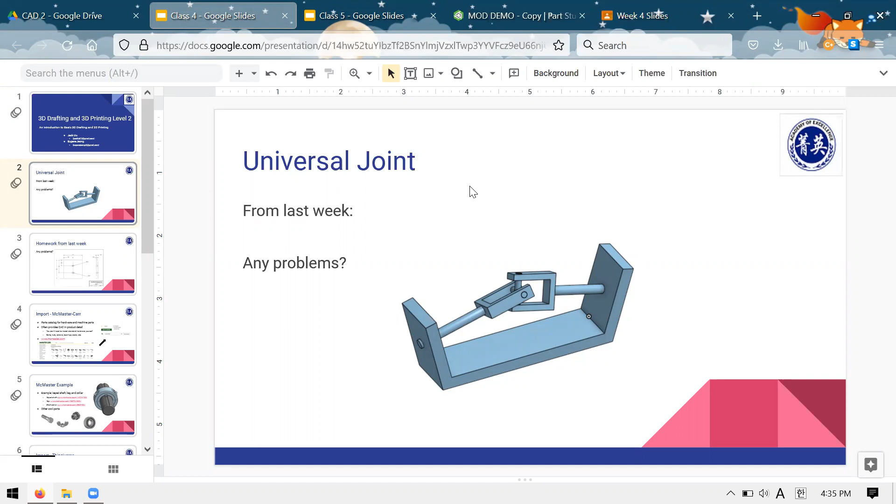Great. So we did that, and then we also went over the base plate, which was the other assignment from 2 weeks ago. I think most people made an attempt at it. By this point, hopefully you know enough about how to read drawings that you could make something like this. Another thing we talked about was how to download parts and import them into your own Onshape document.

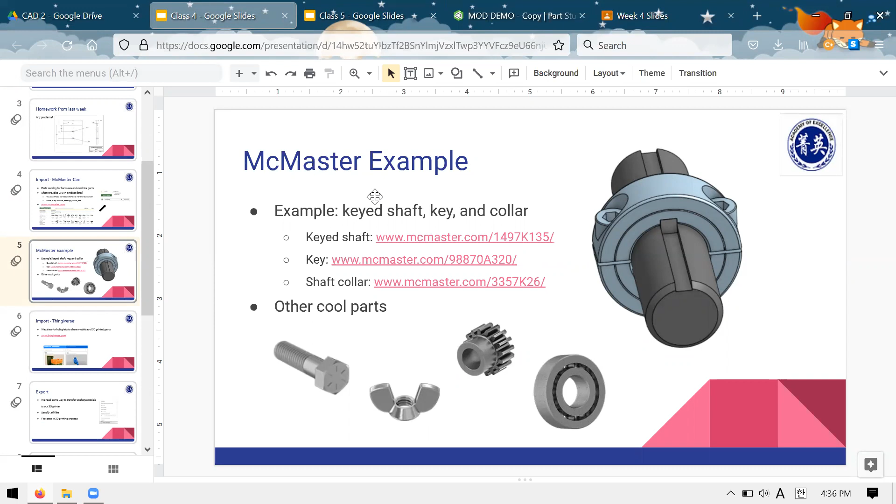So later on, we'll have a part where you'll probably need to download things. So if you weren't there to see it, I'd recommend, if there's a video, watching that or the recording. We also did the inverse, which is exporting a part from your document into a normal file that you can send to other people.

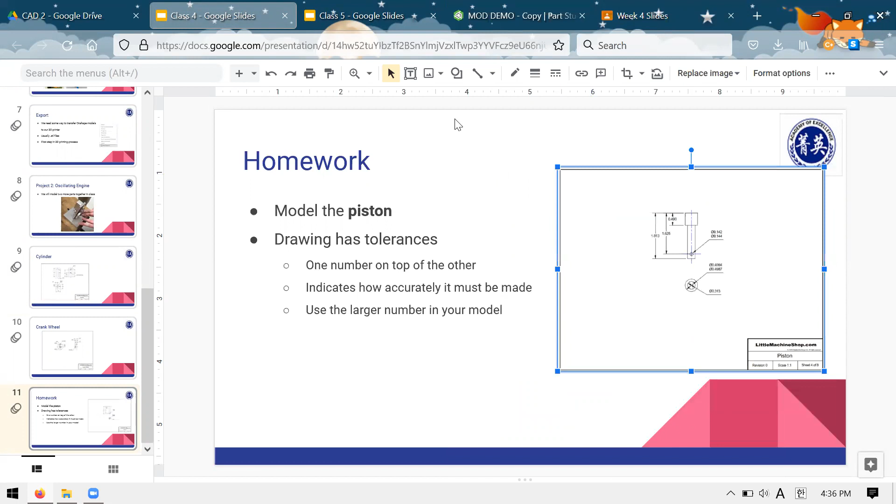And the homework from that week, I believe: in class we made the cylinder together, and the homework assignment, I believe, was this piston. So all of these drawings, as I've said, are available on the Classroom, where I have previously posted all of the drawings, and the website where the drawings originated from.

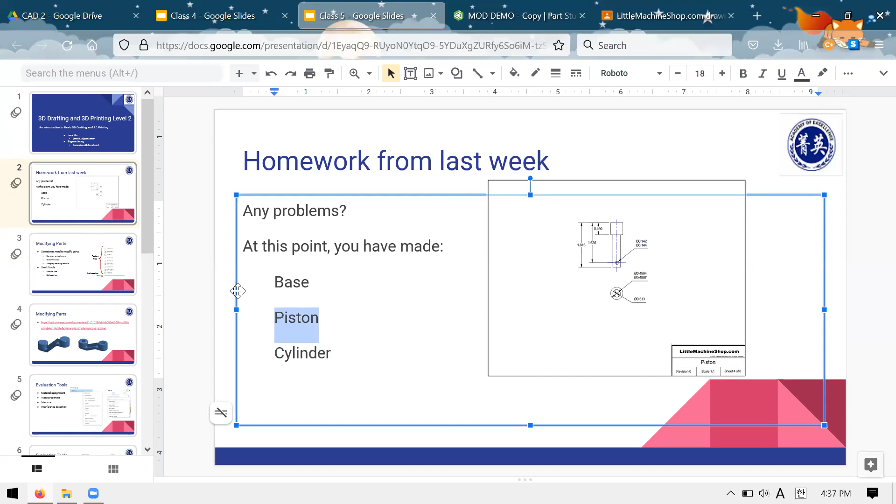So this week, as I said before, we're starting off just taking questions. At this point, you have made the base from 2 weeks ago's homework, the cylinder we made together, and the piston was the homework assignment from last class. So you should have these parts. If you're not quite done with all of them, don't worry too much about it. We have a way to deal with that when we get to that bridge, but if you have any questions with the CAD, I'll go through them with you or debug them.

All right, so the piston was easy enough, right challenging level. I explained you can just ignore the tolerances, so a fairly straightforward part. I'm not too surprised if you don't have any questions. So we'll get right on with it then. So this week we'll talk a bit more about what you see when you look in your CAD program. You may have heard me refer to these things before,

and specifically we're going to look at how you might go about modifying a part, especially if you're working on a group project, you might not be the only person who's working on this document, or you might be working with someone else's part document, and you may need to change it, maybe to fit the new design requirements or to accommodate something to meet your own purposes.

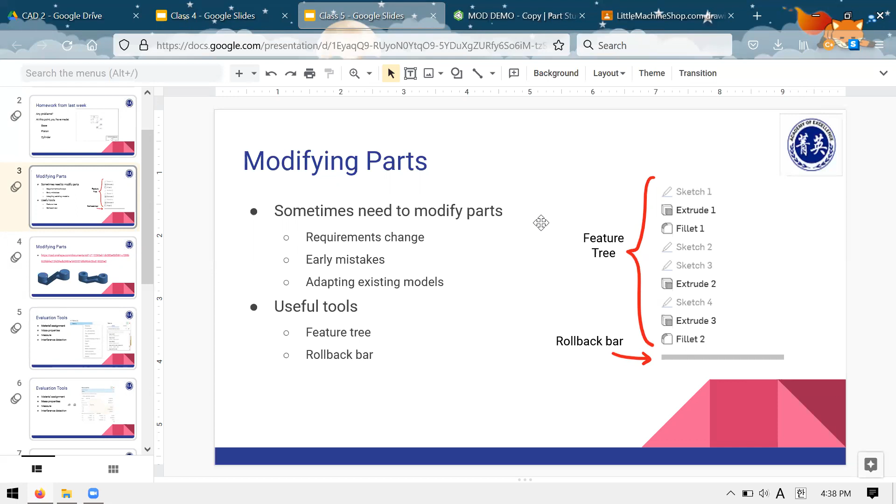So another place where you might see this is when you're working on a model over a long period of time, maybe later on, you discover that something you did earlier on was not good, or there's a mistake and you need to go back and correct it. And so how do you do this? What you've probably seen before many times, I've referred to this as the feature tree.

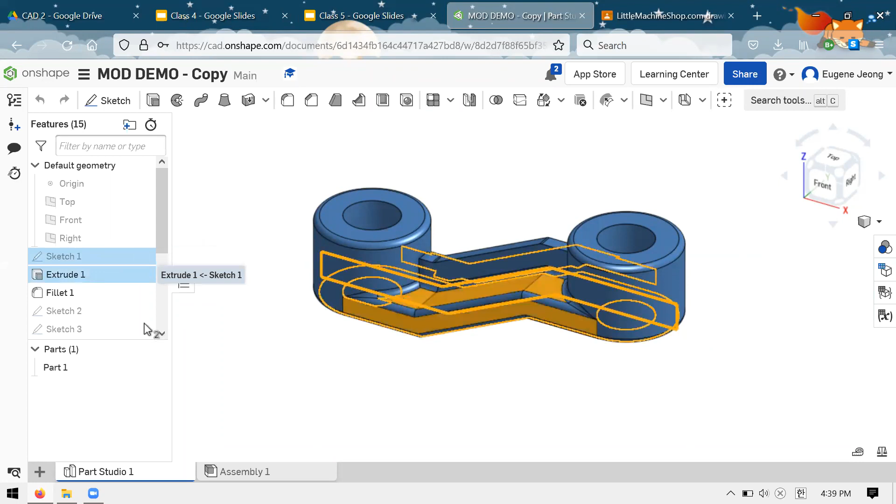So you can see the word features up here. And in this list is pretty much every operation that you've done in the document. So you can see that when I created this part, I created a sketch, I extruded it, I did these fillets, I did more sketches, more extrusions. You can see basically a history of everything that I've done to create this final product that I have here.

So this is what's called the feature tree, and you'll have this on every one of your parts. And one thing I'll show you is that the feature tree adds features in chronological order. So every time you add one, it gets added to the bottom.

And this little gray bar here is called the rollback bar. What you can do is actually click and drag on this and move it up. So let's say move it up to here. It'll actually take you back in history to when you only had these features. So before you created these features, now you're looking at the document at the state that it was when you had only made these features here.

So what's really interesting here is now that I'm here, I can create sketches. For example, I can create a sketch here, draw something. I'm not going to do it, but you can see that I can modify a part, and then when I'm done, I can bring the rollback bar back down, and it'll attempt to recreate all of these other features that I had before. So it's a very useful tool for modifying parts when maybe before I add these holes, for example, I needed to do something else, then I can go back, maybe add another boss here before going for this hole.

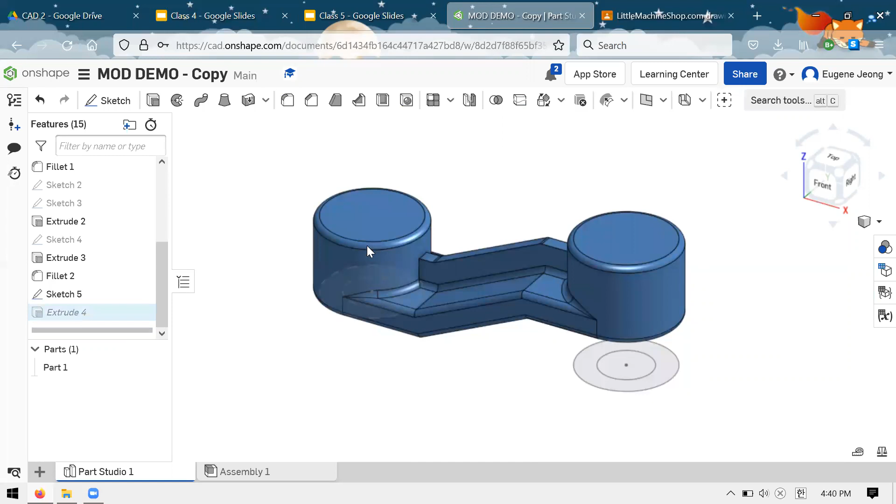That's the usefulness of the rollback bar, which you might not have known existed, but think of it basically as taking yourself back in time before you did any of these things that are below it. And once you're done, you can go back to the present just by dragging that bar back down.

So with that, that part that I just showed you, you should be able to open it up by clicking this link that I put in the chat. If you just click that, I believe I made the document public so that you should be able to edit your own copy. What you may need to do is create your own copy. So in my case, I see this, but it might not let you edit. If it doesn't let you edit, I don't know, it should automatically create a copy, I believe.

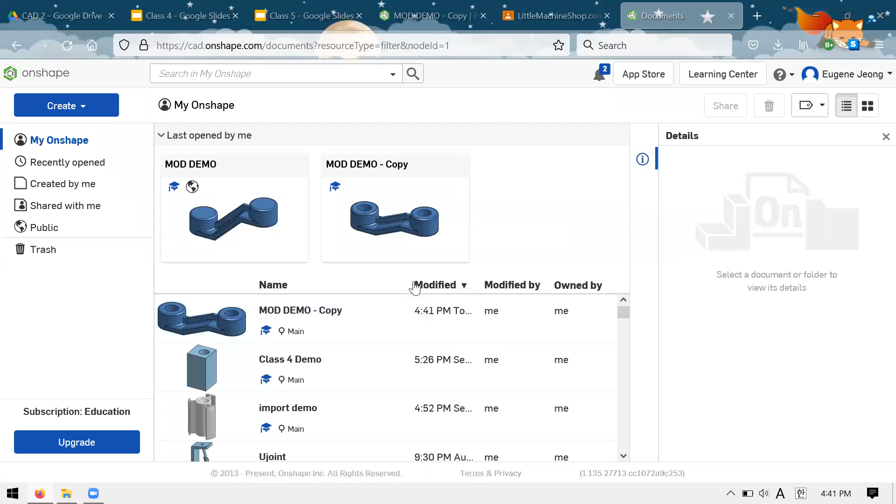Hard to say, but if you click on this link and it opens the workspace, but you're not able to edit it, all you have to do is go back here, right click on it, and, where is it? Copy the workspace. Just hit OK. And for me, I already copied it, so I have a copy of a copy, but the copy you should be able to edit. So take a moment right now just to click on that link that's in the chat, open up this document, and get a version of this document that you're able to make changes to.

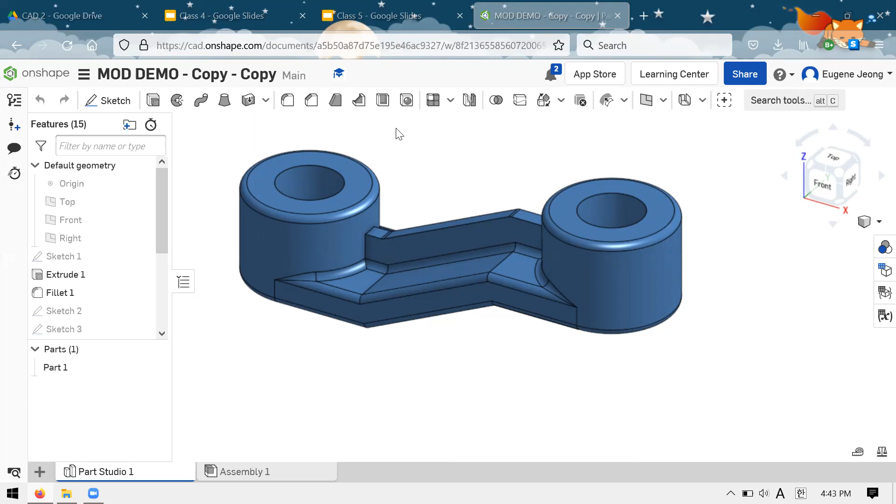If you have any trouble getting there, let me know. And if you are able to open up this document and you're able to edit it, then also please let me know in the chat, or I'll not know when to move on. Okay, so it seems like at least one person is able to do it. So that means it is possible to do it, which is always promising.

Our objective, at least for this activity, is going to be an exercise in modifying a part. So let's say that you're working on one of your project teams, maybe for a school project, you're trying to design a part. And let's say that you're working with someone else and someone else gives you basically what you have here, right? So from here, what you see right now, I believe, is the part on the right. And your task is to essentially create the other one that you see here.

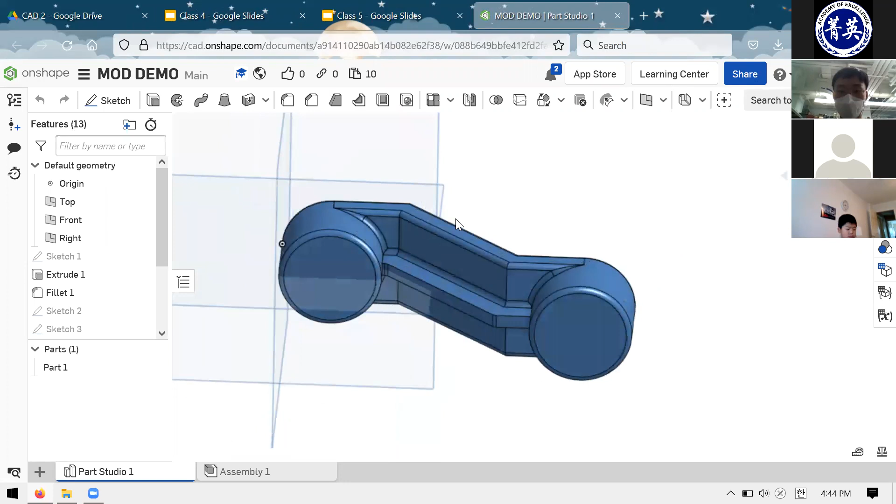So you have this version, sorry. You should have the version on the left with no holes and this steep angle. And I want you to create this version on the right that has these two holes in it and the angle is shallower. So given this part that you see here, and using what you know about how to create sketches and use tools like extrude, just take a few minutes to try to create this version on the right that has the two holes that go through the circular parts and modify it so that the angle is shallower. So you can see here that here the angle is pretty steep, right?

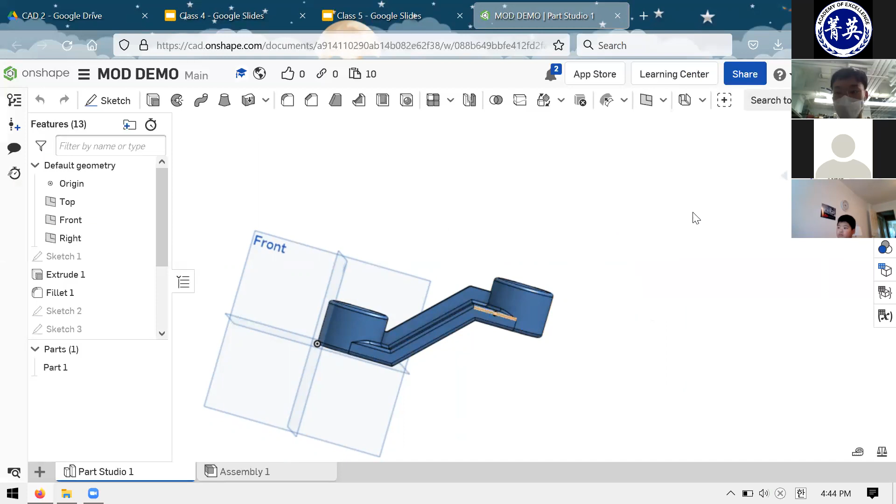You can see this angle here, and maybe you can't tell that well in this image, but here the angle is a lot shallower. So there are two changes you need to make, and I'll give you a few minutes to work on that.

Confused. Yes, I'm confused. I did not get what I'm supposed to do. Okay. Do you have a question? Yes. Don't get what I'm supposed to do.

So the objective here is to take this part that I linked to you in the chat in the Zoom, and from that part, maybe you have to create a copy, but make a copy that you're able to edit, and then make the changes to this part so that it looks like this picture on the right, where there's two holes and the angle here is shallower than the one on the left. So hopefully that was more clear. If you have more questions, just ask.

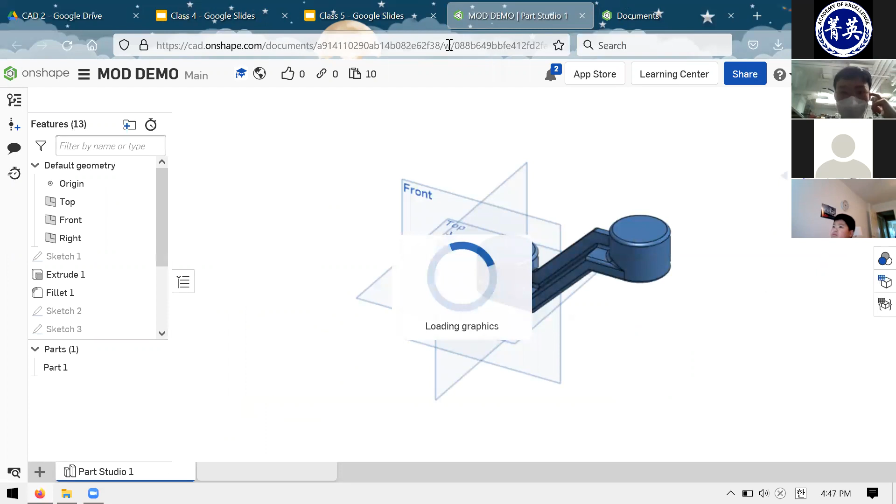I can't. So if you're not able to edit the part, like I said, what you might need to do is go into your workspace, and you might need to create a copy of the workspace. How do I create a copy again? Let's see. In my case, since I'm the one who created the original document, I don't exactly see what you see. I mean, can you just show me? Let me see.

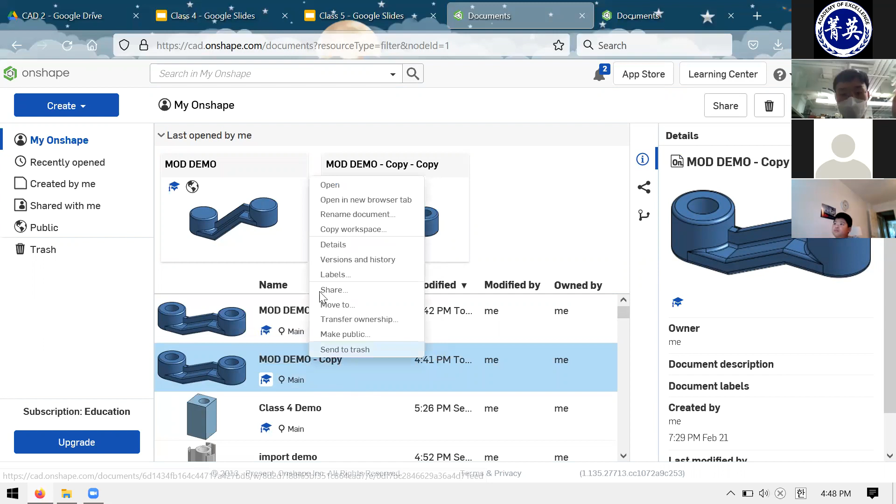So I'm guessing if you just go back to your workspace, it doesn't show you. And how do I copy one? If you go back to this page, are you able to see the workspace of this document, the mod demo? Yeah. You are? I do not see. I see the mod demo copy. No, I don't. Well, if you see something like this, you can just right click on it and click copy workspace. And the copy of the workspace, you should be able to edit. Oh, okay, I got it. And now I can edit it. Cool. It should be simple.

So I'll give you all just a couple more minutes, and then I'll call on someone to explain what they tried to do.

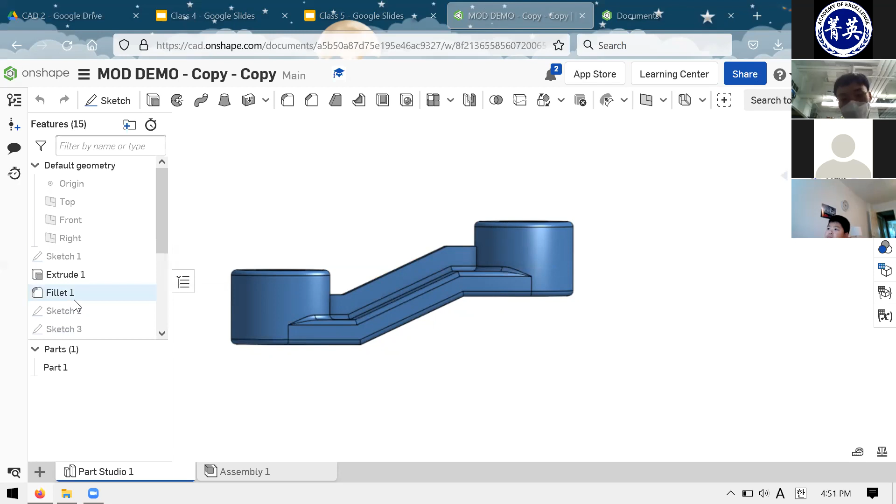All right, so since it seems like it may have been a bit tricky, one thing I would do is think to myself that I see this model and someone else gave it to me. I don't really know how it was created. So what can I do? Off the top of my head, there's not any basic feature that can just change an angle, like stretch it around like I could with my hands.

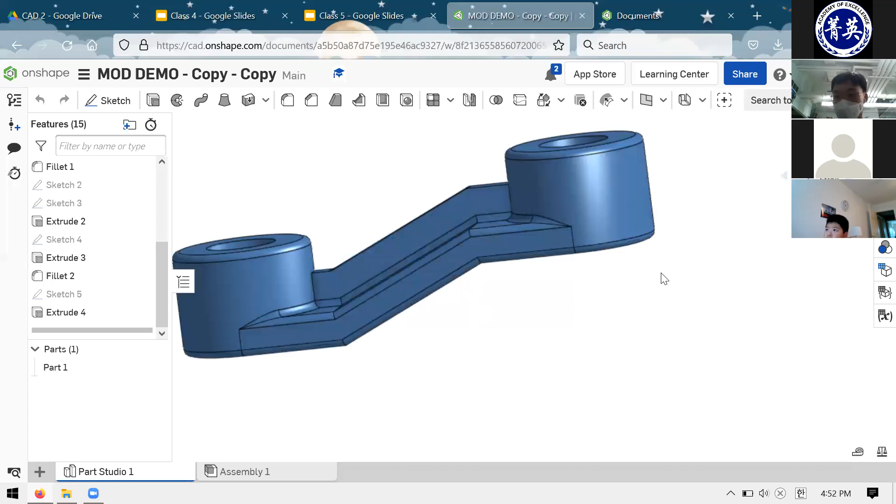So the first thing I want to do is understand how this model was created. And the way I can do that is using this rollback bar, which I explained a moment ago. So we're looking at this part, and let's just roll it back in history. I guess I should demonstrate on the version that you're looking at.

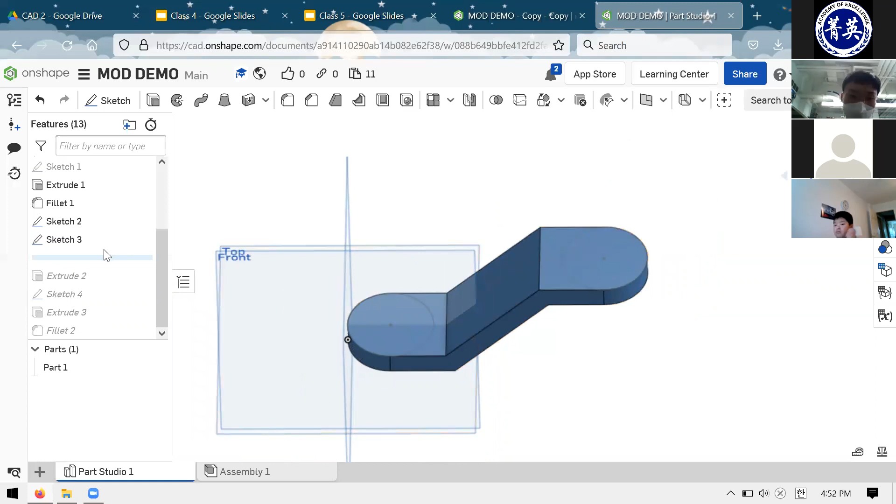I roll it back. So the last change was just rounding off the corners. Let's see, I roll it back again. I can see, oh, the next last thing that was done was creating this kind of bridge here. If I roll it back another feature, I can see, okay, so this person created those bosses, and I go back another feature, they rounded off these corners, and I go back another feature.

So now I see the sketch, and here I kind of see how that angle was originally created. It was created as a sketch here, where this angle is probably defined somewhere in the sketch. So at this point, what I figured out is that the creation of this angled feature happened no later than this very first sketch. So I know I have to change this sketch in order to change that angle. So I go in here, I click on edit sketch as you do, and I can look at the sketch. And fortunately, the sketch has been defined in such a way that I can easily see where the angle comes from. It's this dimension right here.

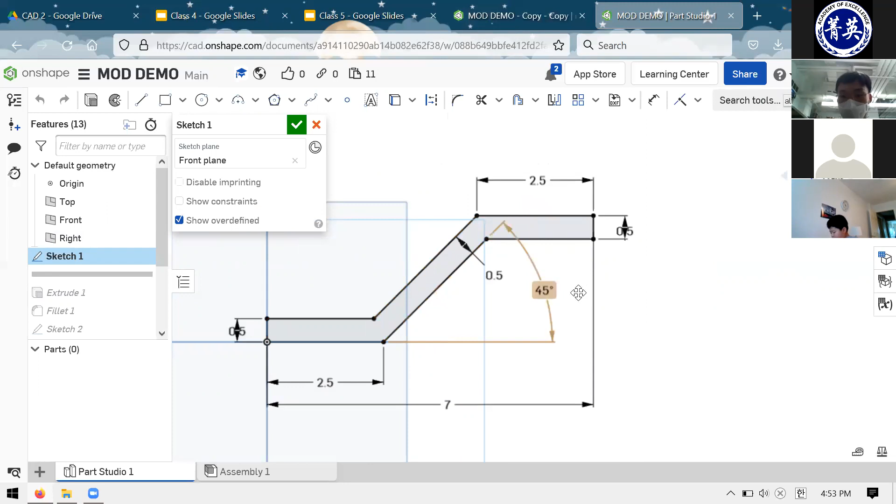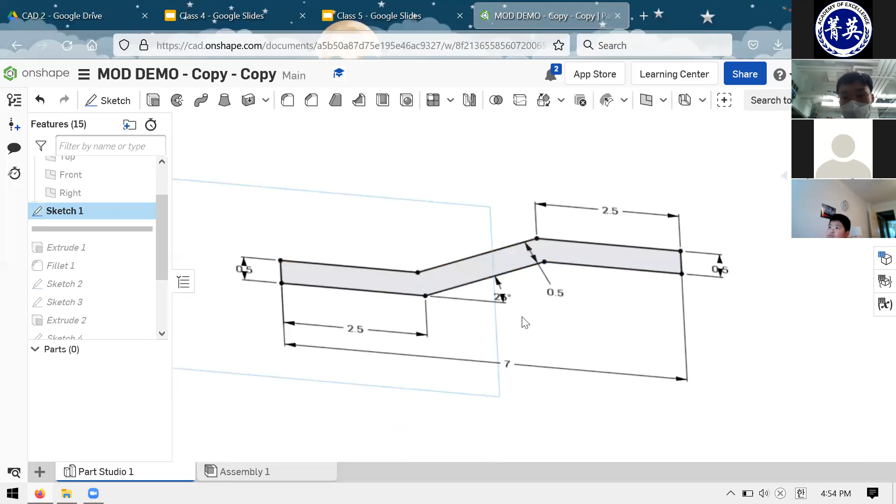So what I can do, and I'll go back to the other document. What I can do in this situation is go into the sketch, hit edit, and I can just change this angle. So you saw in the other version how it was 45 degrees. Maybe I can change this even further, maybe to 10 degrees. So now it's even shallower. And if I click OK, the sketch is OK.

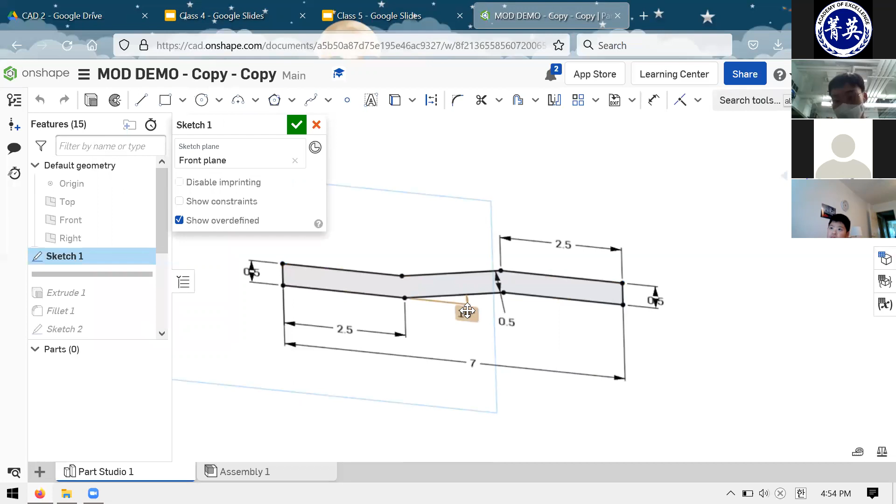And let's roll it back to the present time, with all the features on it. You can see, because this part was designed fairly robustly, at least robustly enough to handle that changed angle, that the final result now has that changed angle. So we kind of went back in time. At this point, I identified what sketch the change I want occurred in. I entered that sketch, and I can just go in and type whatever number I want. Maybe I'll go back to 45 degrees. I made sure that it works, and then I just rolled back to the latest feature and the model updates.

So hopefully that all made sense. If you had any questions about that, let me know. But it's kind of an approach that you might use if you're greeted with a part that is pretty unfamiliar to you, but using the rollback bar, you can get a good sense of how this thing was created chronologically. And that can let you make the appropriate changes as well.

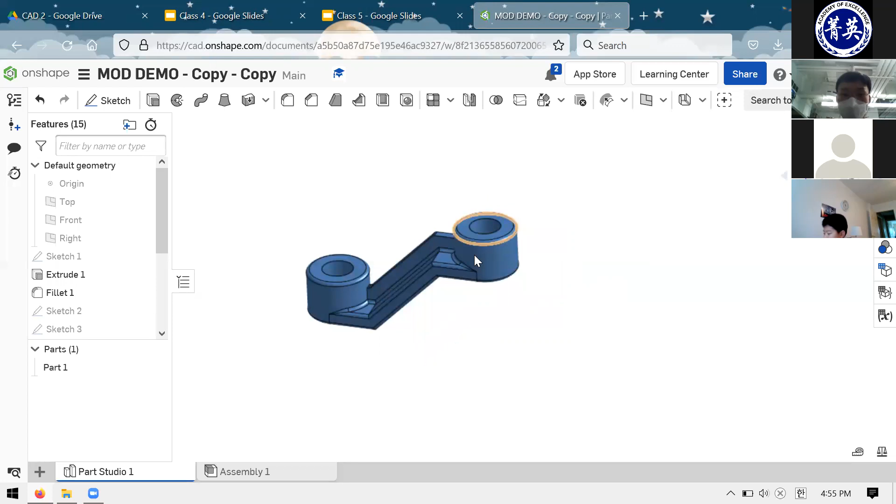One thing that I'll say is that not every model is constructed in such a way that you can just change things like that. There's a lot of times, maybe with fillets especially, where if you make a big change early on in the feature tree, there's a good chance that it will just break things, or these features will refer to things that no longer exist, and then the whole model will kind of break. So in those cases, you have to individually go through each of the broken features, figure out what's wrong, and fix it. So in this case, we got kind of lucky, but it worked out, and hopefully it taught you something useful.

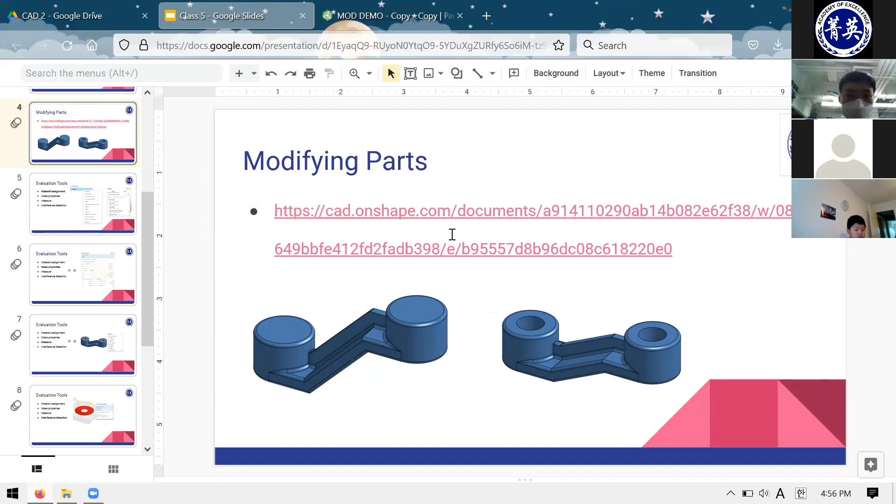So that was our first activity. I didn't hear any questions, so we'll move right along. I'm now going to show you a few other tools that are very useful in the Onshape environment. A lot of these tools are common to other CAD programs, so if you use those, you'll probably have an equivalent. And these are especially helpful if you're designing a part for a real project, maybe a school project or a team where you're trying to build, say, a robot. In those cases, you need more information about the model that you might not be able to get by looking at it.

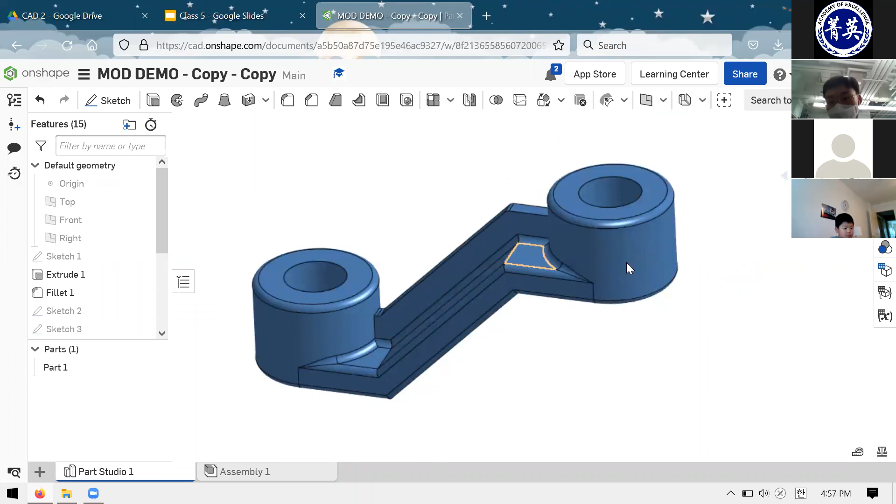And the first thing I'll show you is material assignment. So let's see. I'll just work in this copy. When you create a model, the computer doesn't treat it like a physical object, right? It's just a bunch of geometry, and this geometry consists of basically an enclosed volume. But in real life, there are no such ideal enclosed volumes that just exist abstractly. All objects in real life are made out of some kind of material, and that gives them properties such as weight or density, strength. All those come from the material.

So if you want to understand, for example, how much your part weighs, then it needs to have some kind of material. So if you right click here in the bottom left corner on the part, one of the options here is to assign the material.

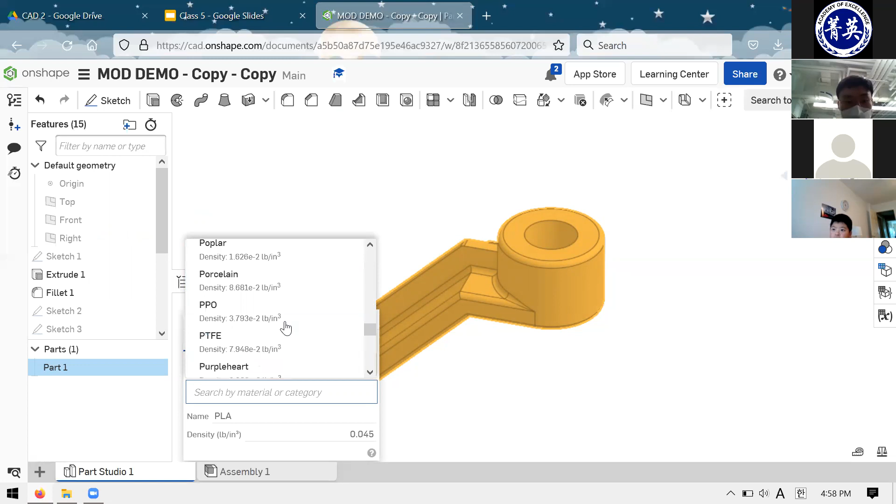And if you do that, Onshape provides this material library. So for most purposes, you'll probably find something appropriate there. You can also do a custom material, but you probably don't really need that. And you can scroll around here, you can see there's a lot of options. PLA is the common 3D printing material. So that's probably one that you'll use if you use this feature at all. So let's say PLA, and it adds a density of PLA right there.

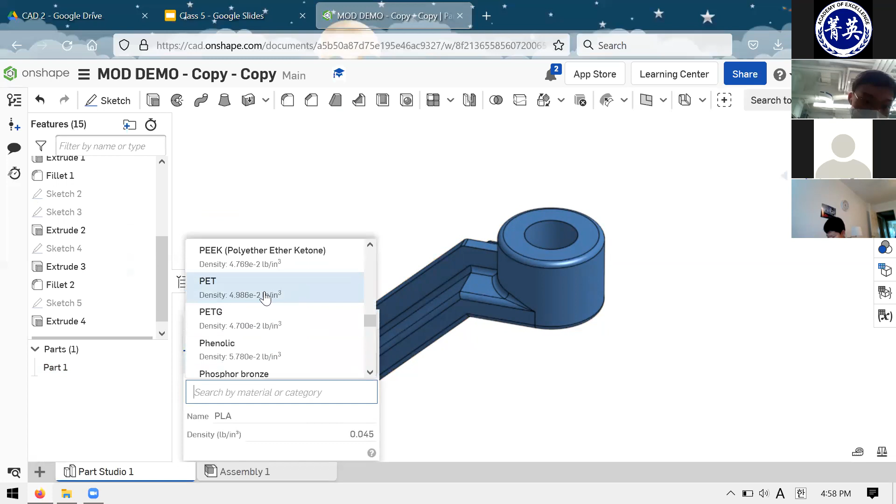So if I check on this, now Onshape will treat this... oops... It'll treat it as PLA. So I can change it to something else as well. I don't know, PET. If I change it, I can click the check mark and it'll make the appropriate change.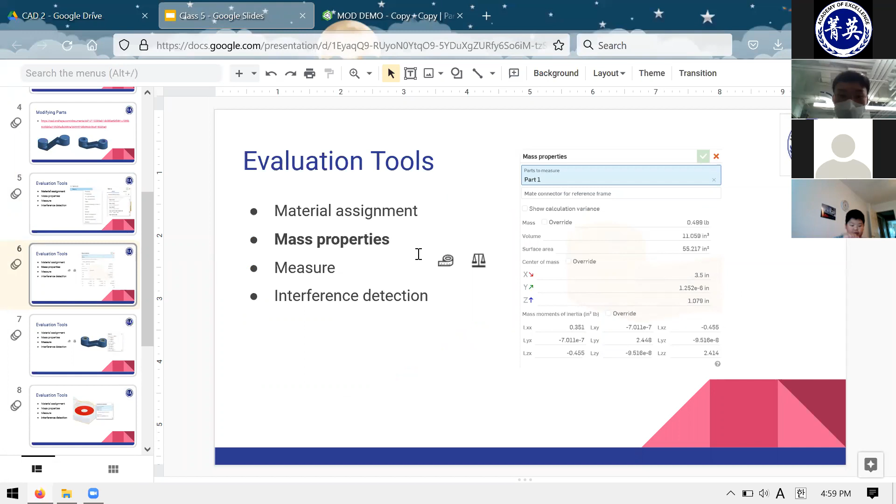So what was the use of me doing that? That's where this next thing comes in, and that is the mass properties. And so mass is very important when you're designing something, especially for a real system like a robot, because there you care about a lot of things like, for example, the weight distribution, or just in general, how heavy this thing is. So at the bottom right corner here, you can see there are two symbols. On the left is a tape measure, and on the right is a beam balance. So if you click on the balance on the right, you can see mass properties.

And the first thing it prompts you is for a part to measure. So I only have one part in this workspace. I'll click on part 1 here. And you can see right away that it pulls up all of these properties. So if you didn't assign a material, it won't know what the mass is because it's just thinking about this kind of abstract geometry. But once I assign a material, then it knows the density and it can calculate things like the mass. The volume is just geometric, likewise, surface area is geometric. But you can see how this might be useful.

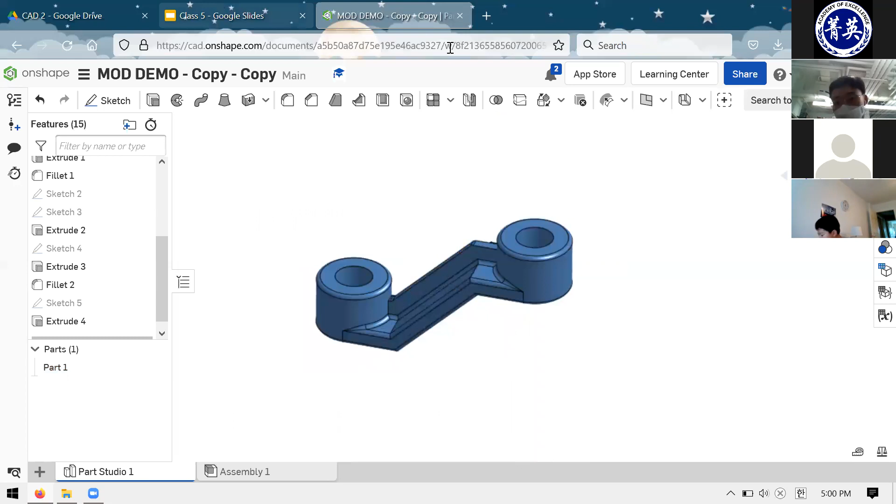For example, where you might need to know how big it is, how much surface area it has. If, for example, maybe you're trying to paint this thing, how much paint you need, that's related to the surface area. And there's no need for you to calculate things like that by hand because you have this handy tool here that'll tell you these things. Other things like moments of inertia, that's useful if you're doing strength calculations. You have things like center of mass. It's useful for weight distribution. So these tools exist. Don't worry too much about when you'll use these, but just know that they do exist. So if you ever do need them, you kind of have that connection there.

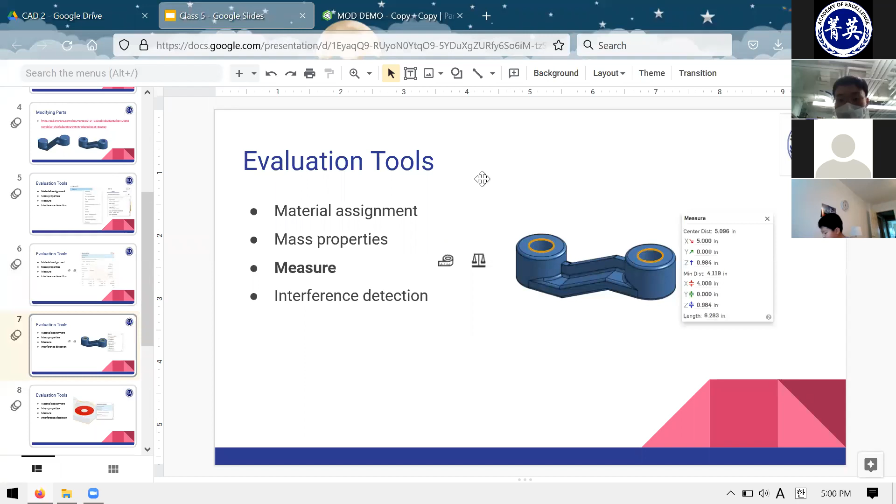This third tool is called measure. And this is probably the most useful one. I believe we may have even shown this in the previous CAD class when we were trying to figure out how big things are, but we have this tape measure here. And if you click on it, it tells you to select entities to measure. And that pretty much means you can just click on things and it'll tell you details about its size and dimensions. So you can see that I clicked on a circle there, this highlighted orange circle with the measure tool.

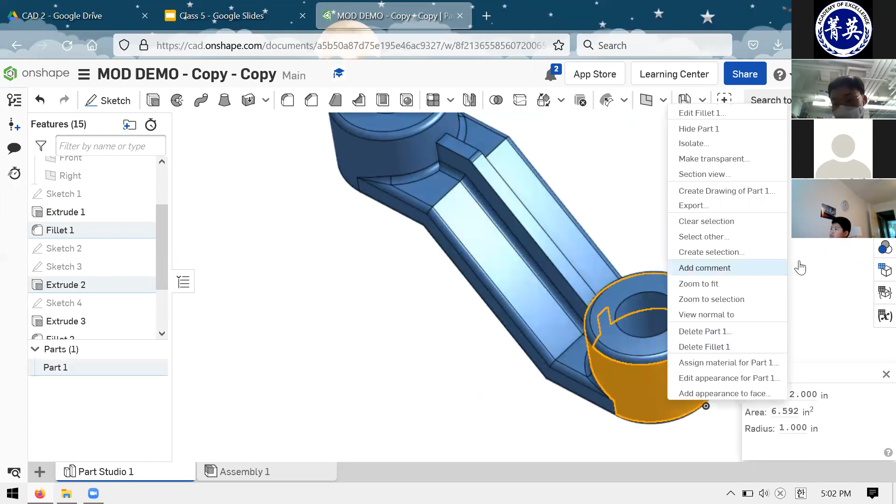What else can the measure tool do? It's very versatile. For example, if I want to know the length of a line, I can just click on the line. This line is 3 inches long, plus some change. I can also click on surfaces like this. It'll tell me some other features. This is a circular surface, so it tells me the diameter of this cylindrical cross section. It tells me the area of this, and it tells me the radius. So pretty standard. Now, what if I want to know something like the center to center distance between these circles, right? Maybe I'm designing another part where I have to align some pegs to go into these holes.

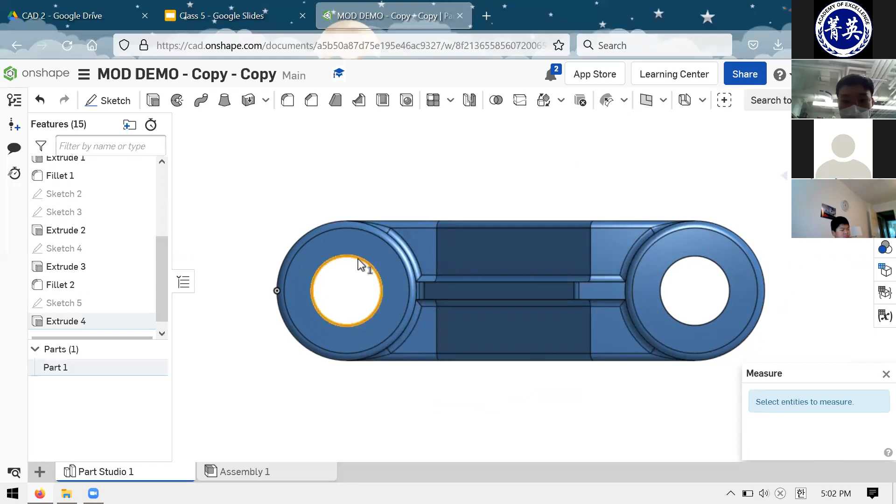There's no line that just connects the center of the circle to the center of the circle. But what I can do here is I can click on the circle, and then without clicking the background, I click on this circle. And now Onshape does even more things. It tells me the center distance. So if I hover over here, it shows you that black line. That's what it's measuring, the distance between the circles.

Tells you how that distance is kind of divided into components. So the center distance is kind of like a diagonal line, but maybe you're just interested in the horizontal distance. Then you're interested in this x distance, which is 5 inches. Maybe you're interested in the z offset, so the height difference between the circles, that's minus 2.207 inches. There's also the minimum distance, which is the closest distance between those features, et cetera.

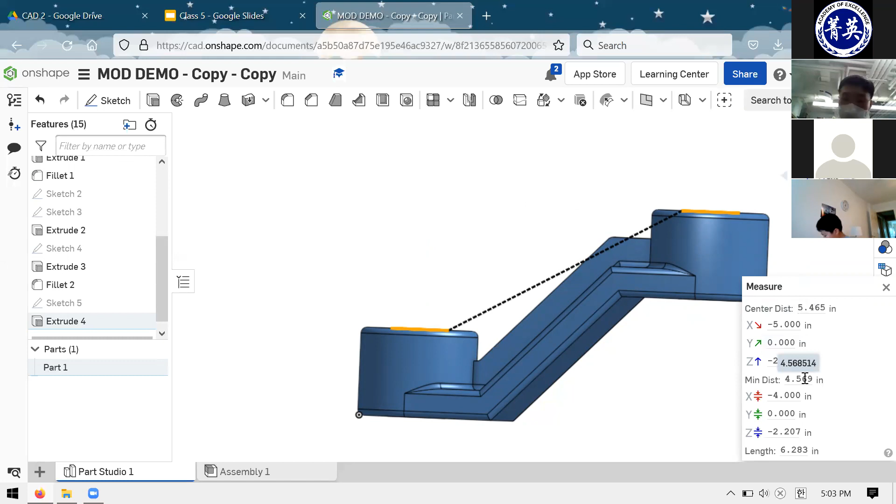So you can see if you ever need to know something about this part, especially since last week we talked about how you can import parts that other people made, things from websites like Thingiverse or from parts catalogs. And for those, you might not even have access to these features, right? You might not have access to the sketches and the extrusions and whatnot. And in those cases, it's very important to have a measure tool so that you can design your own things to match up to the dimensions of whatever you got.

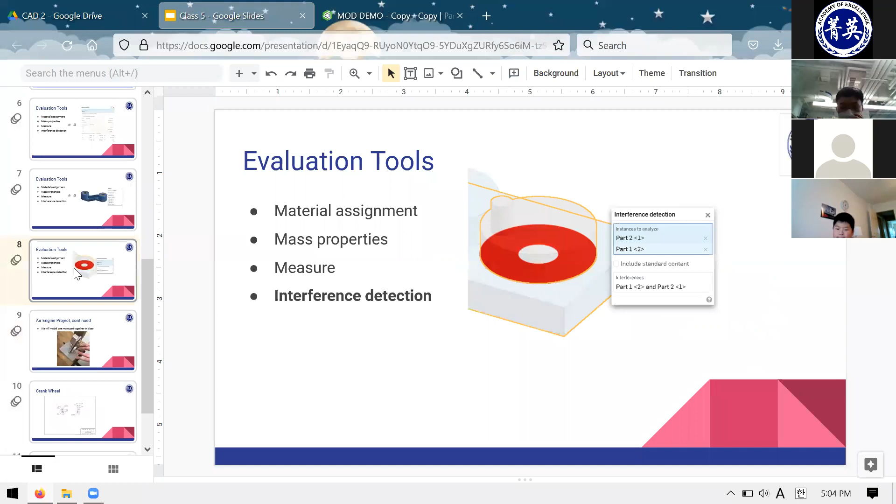And the last thing here is called interference detection. And this is useful for assemblies specifically. So a lot of the reason that we create assemblies in CAD is to make sure that this thing that we're trying to build in real life can actually be built and that it moves the way that you expect it to. For example, if we're trying to build that ellipse trammel in real life, we'd want to make sure all the parts fit together and that the handle will be able to move correctly. Same with the U-joint. You'd want to make sure that the things can actually turn and they won't bind or get stuck. And the CAD helps you do that.

But one thing that might not be completely obvious just by looking at an assembly is whether or not different parts are completely clear of each other. In other words, it's possible that you design things where the parts are actually going through each other or occupying the same space, but... Excuse me. Yes. What does Onshape do if your parts are overlapping? What does Onshape do if I have overlapping parts?

Yeah, so that's a good question. That's kind of what the interference tool does. Onshape doesn't actually care if you create an assembly and the parts go through each other. You've probably seen this before when you're trying to insert parts or fasten parts together. You remember how sometimes the parts would just come in upside down and then they'd just be going through each other. So Onshape will let that happen. And if you don't catch things like that, you might make a mistake in your assembly where you have something that's not physically possible.

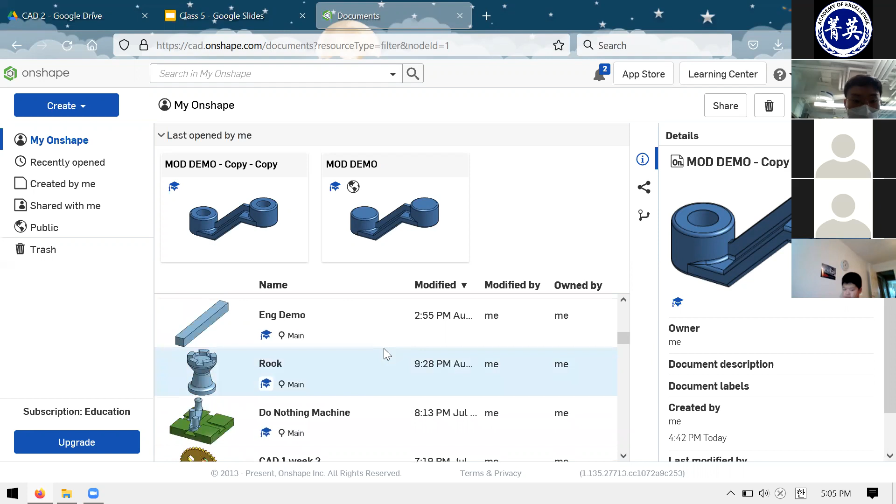Let me see if I have an assembly to demonstrate this with. How about our do nothing machine? So consider our handle here, right? Let's say that for some reason I accidentally put the handle on backwards like this, and you can clearly see here that these parts are intersecting each other. If I click on this, you can see the outline that kind of goes through the link.

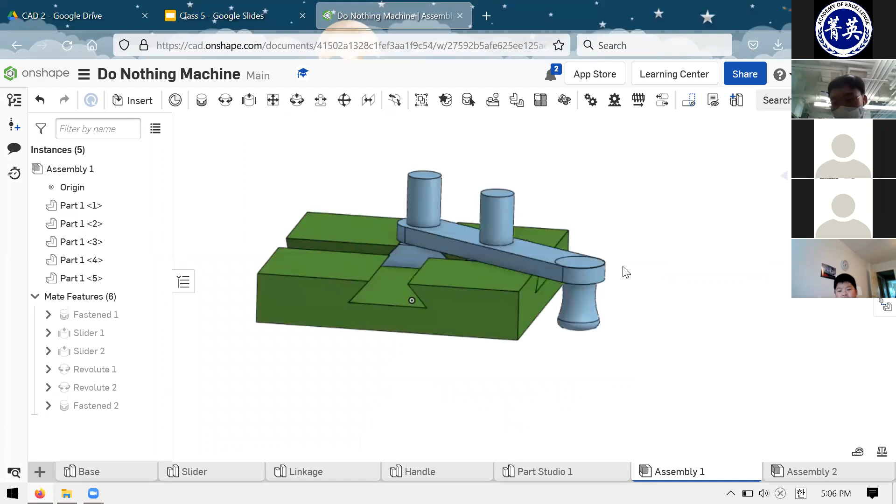So this is not good because in real life, you can't just stick the handle through the link and have them occupy the same space. But just at a glance, casually looking at something like this, I might not catch that. So what can I do in this situation if I'm trying to verify my assemblies to make sure they're good?

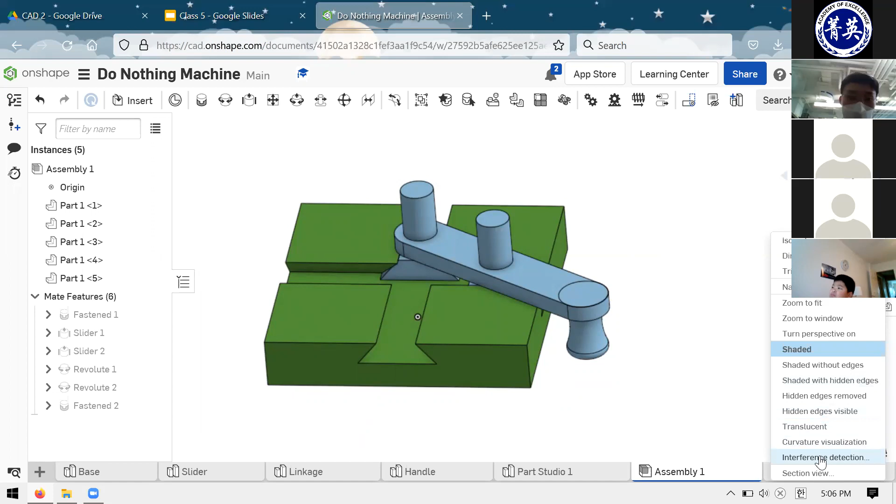I believe here on the right, underneath your navigation cube, you have this other cube with a drop-down menu. And if you scroll down here to the bottom, there is a tool called interference detection. So if you click on that, it prompts you for instances to analyze. So let's say that in this case, it's pretty obvious where the interference might be, but I select these two parts, the link and the handle, and Onshape detects that these parts are intersecting each other, that they're interfering with each other, and it highlights it in red.

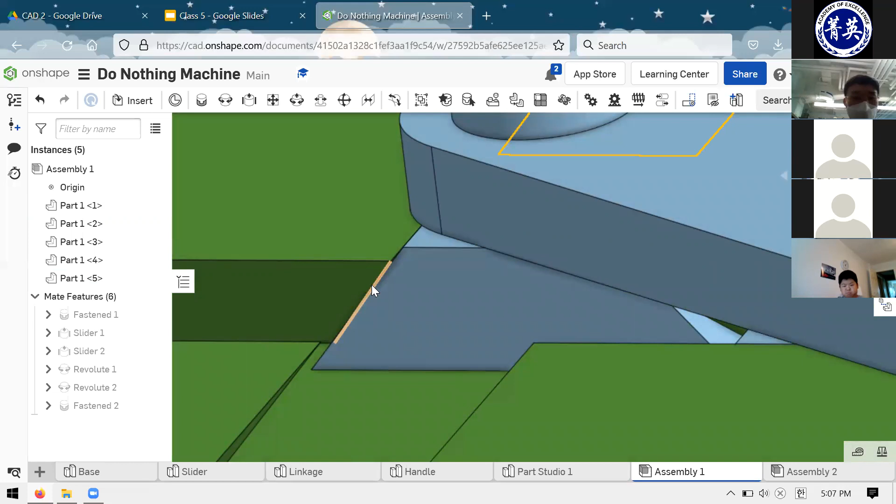So now it's pretty obvious to me that these parts are going through each other. And you might say that that's such an obvious example, or like, why would I use this tool to tell me that? But in a lot of cases, it's not entirely clear whether or not you have a clearance because it's a lot more subtle than this, right? You might have an assembly here, maybe you're concerned that this trapezoid is slightly too big and it's just barely clipping into this wall. Even if it's a very small amount, it's still not good for making things in real life because, depending on the application, you might want some clearance between the parts.

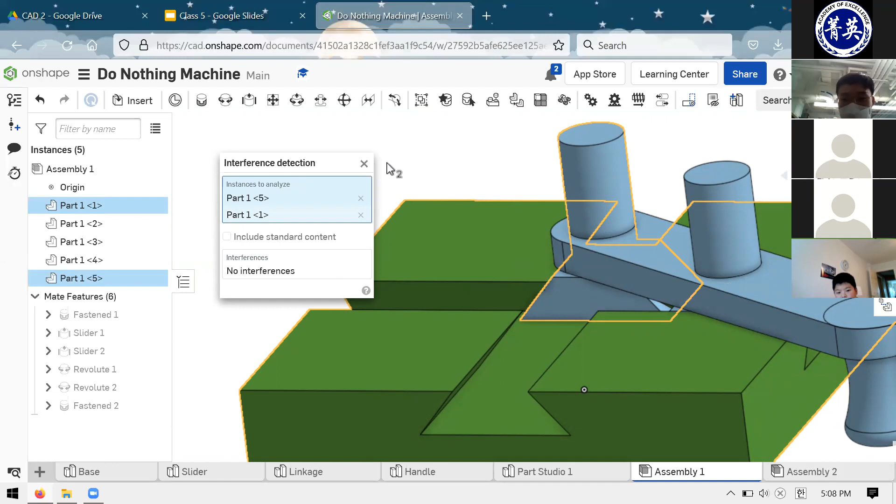So when it's not obvious, you might just want to use the interference detection tool to make sure that your assemblies are okay. For example, if I click this and this, it tells me no interferences. So these things are not interfering with each other. They occupy different space. So I'm all good on that front, as opposed to this and this, where, oh, I do have an interference here.

So those are the tools. There's a bunch of other evaluation tools in Onshape and even more in other CAD programs, but hopefully this is a good batch to get you started. Don't worry too much about, oh, I have to use these right away. Just when the time comes and you need to do something like measure things, you'll know that the tools exist and you can just look up like, oh, Onshape, how do I measure the mass of my part? You know now that most CAD programs will have a way to do that.

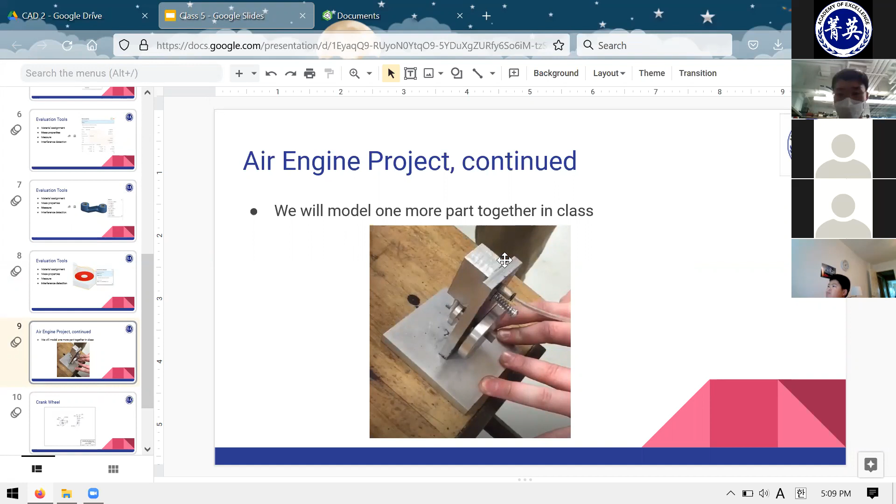So that was kind of the me talking part of this class. Now we're gonna resume working on this air engine project. I know at least two of you missed a class, so you might not be completely caught up on all the parts. That's fine. The main thing that we covered last week that was new is the hole tool. So I'd recommend looking at that class just to know how to use the hole tool. But in reality, for our purposes, you don't really need the hole tool since we're not going to machine this in real life. You can extrude cut a circle and it's functionally more or less equivalent.

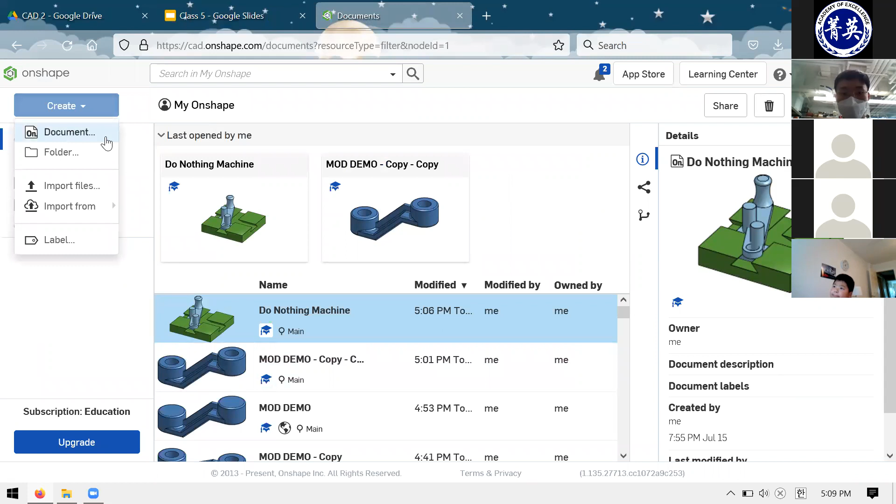But I think I will actually go through the hole tool today as I'll demonstrate the crank wheel, which is a part that we didn't quite get to last class. And we'll make this together. So I want you to open up the document that you used when you were making the base plate or the piston. I want you to have basically all of your air engine parts in the same document as different part studios. So if this is your very first part that you're making for the air engine, just make a new document and put all the future parts in there.

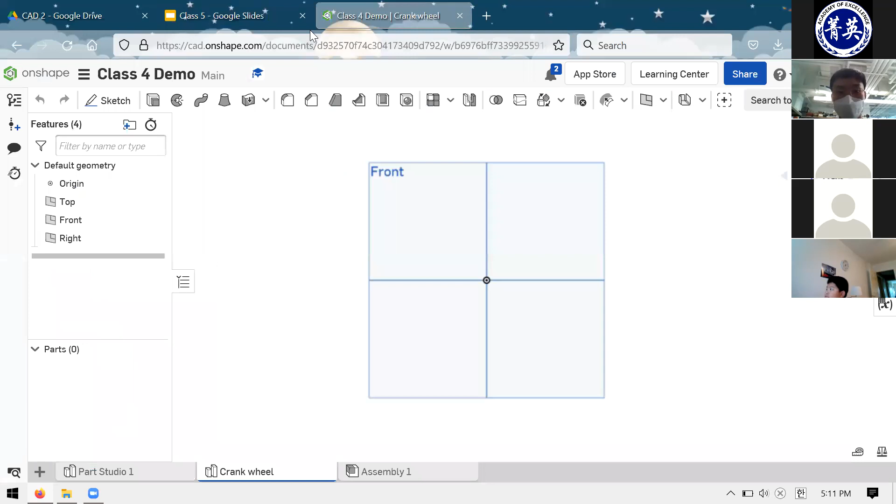Christopher, how about you? What shapes do you see and what features would you use to make this thing? This is a rectangle. Rectangle. Yeah, on the right drawing. Okay, yeah, I see rectangles here. And so what features do you think we'll use here? I think it's a rectangle tool. Okay, sure, yeah, you can use that. In terms of features, in terms of the 3D aspect of it, how would you make this thing? Just make it a box. Make like a box.

So it's a rectangular prism. Yeah, sure. So I agree with the part where you can use rectangle tools or line tools to make your sketch. But in terms of interpreting this drawing here, let me blow it up a bit in case it's a bit small. It's not quite a rectangular prism. It is a prism of a kind, but it happens to be a circular prism, or a cylinder, as some might call it. So again, that's just a matter of getting experience with how to read these drawings.

I know when you're first working with them, it's not the most obvious how to convert these shapes into 3D objects in your mind, but on the left image, you can see you have these concentric circles. And when you look at it from the side, you can see the rectangles. So that tells you that essentially they're cylinders. Hopefully that's clear, but if it's not, as we go through the CAD, it'll probably become more clear.

But I do like the idea of using rectangles or rectangle-like shapes. And that's because, like I said in the past when we talked about the revolve tool, when you have this kind of tiered cake structure, you want to use a revolve rather than multiple extrusions, just because it'll keep your things cleaner. So with that, let's get started. The first thing I'm going to do is create the basic shape of this, which is going to be a kind of tiered cake.

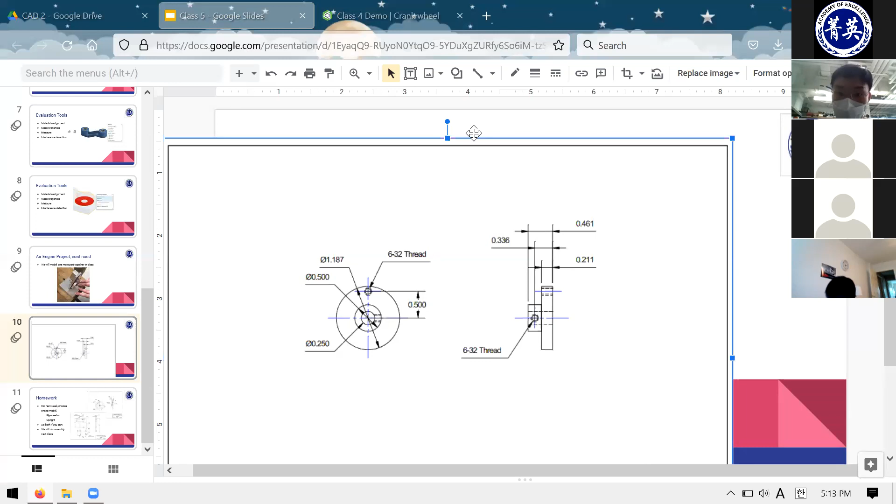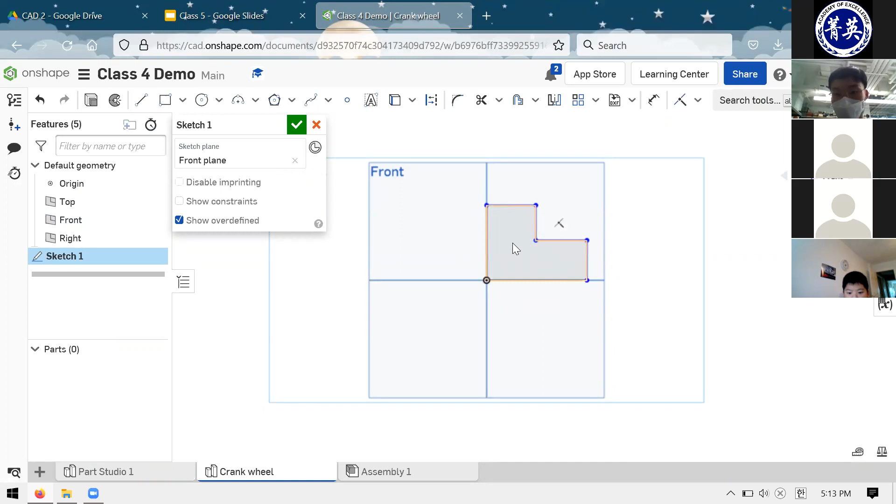And to do that, I'm going to create one of these half profiles when you cross-section it. So it's going to be like an L shape or a staircase shape. So let's try that. Create my sketch on one of the planes. I chose the front plane, but as you probably know, it doesn't matter. And the general shape I want is some kind of L or right angle block shape.

And you'll notice that as I drew my lines, I was careful to make sure all of these constraints were built into it. So these lines are all automatically perpendicular and vertical and horizontal. And so there's already a bunch of constraints in here that I get for free just because I was careful with how I drew my lines. So you don't have to do that, but it'll save you some trouble.

So I see that shape. Hopefully you see where I'm getting this shape from. It's this L shape here. And now the next question, of course: how big do I make things? We look at the drawing and we see all the dimensions there. So let's start with 0.461. That's the distance from here to here.

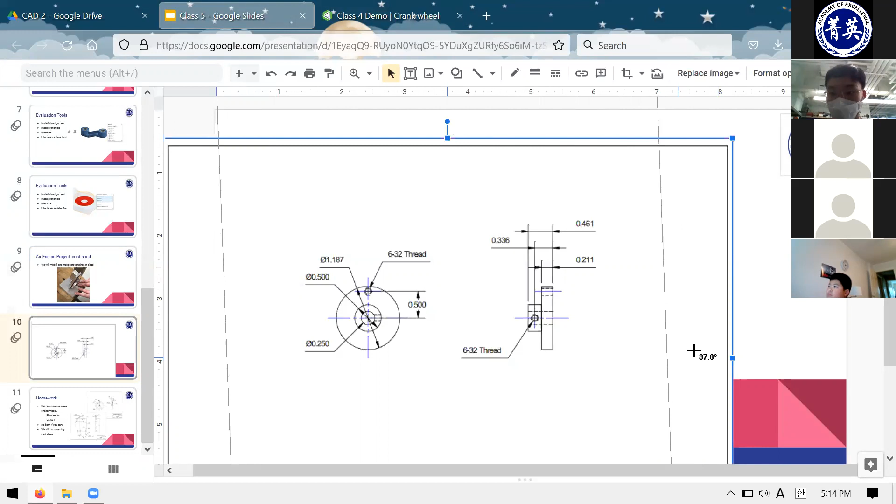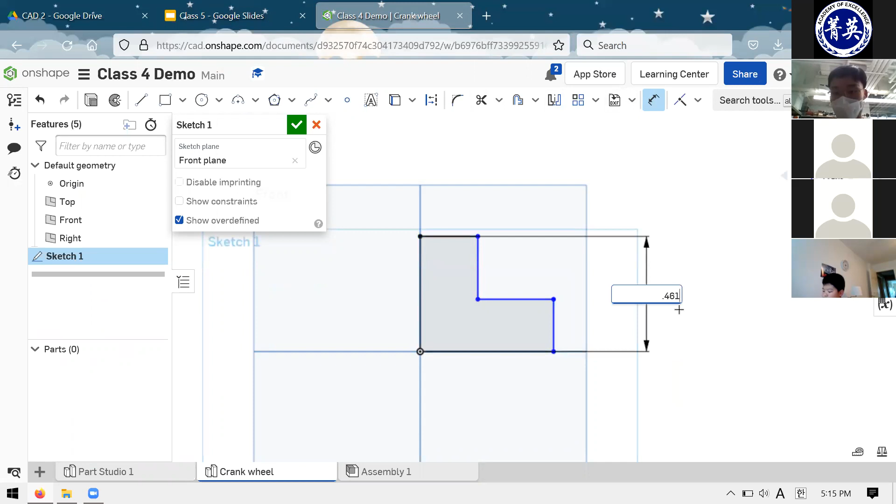So the way I'm going to do this, I'm going to treat it like it's sideways. So in my Onshape, I'm going to be modeling it like this. But the dimensions are going to be the same. So 0.461, that's the height of my cake. So from here to here, the height of my cake, I can also just dimension this line to be 0.461. Let me just move that over here.

So that's good. And then the height of this bottom part, this thin disk here, the height of that is 0.211. So again, you can just dimension this line segment here. So this one should be 0.211. So that's a good portion of this part done.

We still have blue lines, so let's drag them around to see what degrees of freedom we have left. So basically the horizontal distance, the length of this line and the length of this line, are left to be dimensioned. And I can do that as soon as I find out what the dimensions are. So I'll rotate it back so I can read the text.

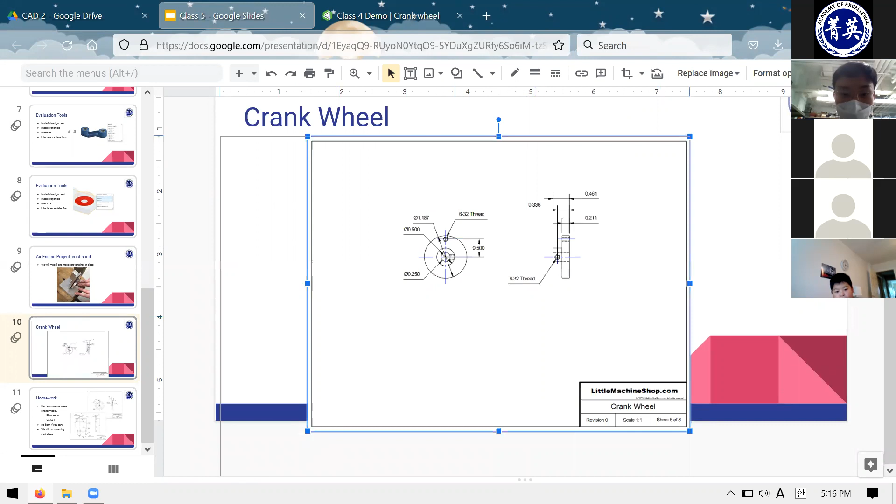In this case, we have to do a tiny bit of math, as it doesn't quite tell us the distance from this center axis to the end here, but it does tell us the diameter of the circle that we're eventually going to get. So from the axis here to the end of the thin disk, we have a diameter of 1.187. So we divide that by 2 to get the distance from here to here. So 1.187 divided by 2.

So to dimension this line here, again, the number is 1.187, and I'll divide it by 2. So you can actually just put operations where you ask for dimensions: you just type in 1.187, slash for division, and then the number 2, divide by 2. Pretty straightforward, hopefully. Feel free to ask if it's not. And there you go.

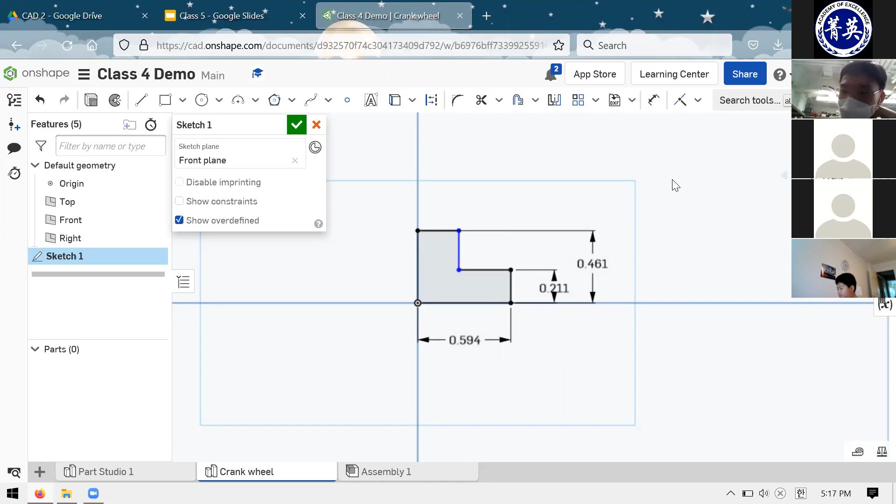So yes, I heard an... It was me umming. All right, yeah, that happens. I do it all the time as well.

So the other dimension is the diameter of this thinner, like second layer of the cake, this stubby disc. The diameter of that, if we look at the drawing, is 0.5. So we know that the radius, the distance from this axis to the end of that, like thinner disc.

You're going too fast because I can barely keep up. All right, thanks for the feedback. I do appreciate it because it's hard for me to have a sense of that kind of thing.

Hopefully, looking at this drawing, you know how to dimension these lines. I'll leave this up for a few seconds, but the dimension of this is 0.5 divided by 2. And again, just to recap what we're doing and to let you guys catch up, we're trying to create this kind of L shape, or this, I guess, block with the corner cut out shape.

And where we're going to go from here is we're going to revolve this sketch like we've done before for handles on parts. And when we revolve it, the shape is going to essentially create two cylinders that are stacked on top of each other, which is the basic shape of what the final part is going to look like.

The main new thing that you learned from watching me do this is that you can put math operations for dimensions. So 0.5 divided by 2, you can see that I typed this in for this dimension, and if I press enter, it's able to do the math and put in 0.25. So I'll leave this up for a second.

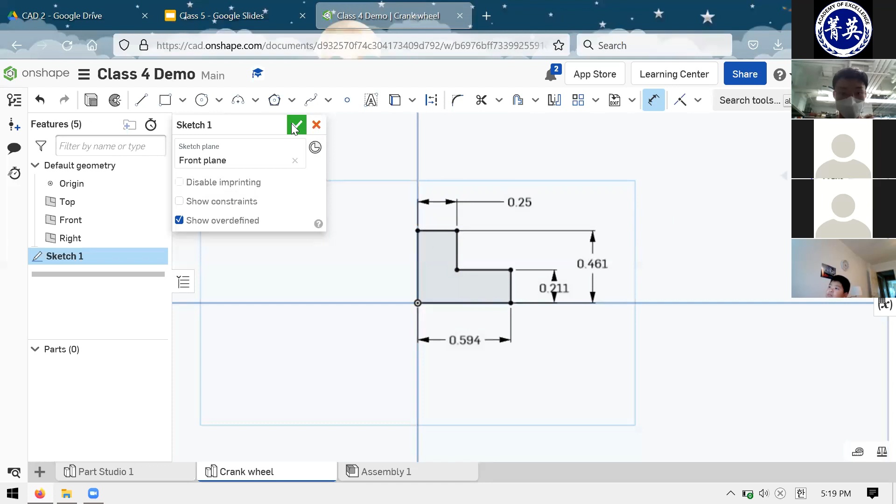In terms of sketching though, these are all things that you've seen before and have plenty of practice with. So don't be too overwhelmed. Not much is new here. I'll accept the sketch, and as you know, we get our sketch profile. Should look something like that. Hopefully you're all able to get the dimensions.

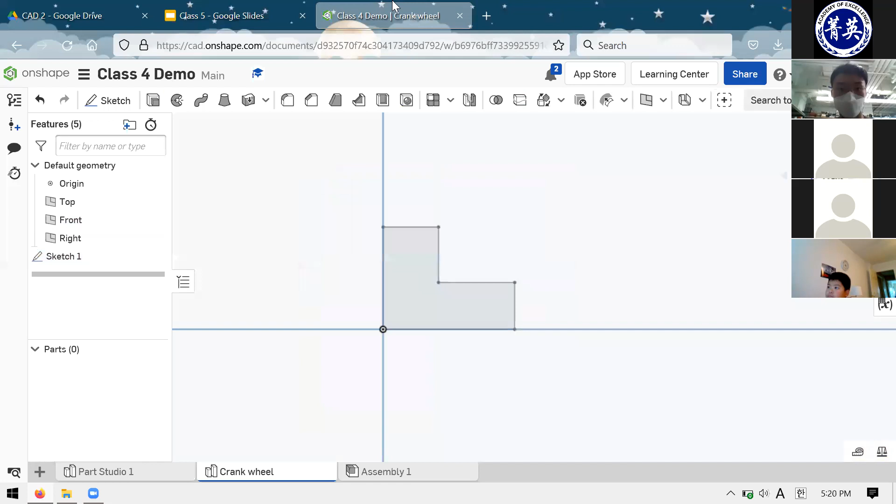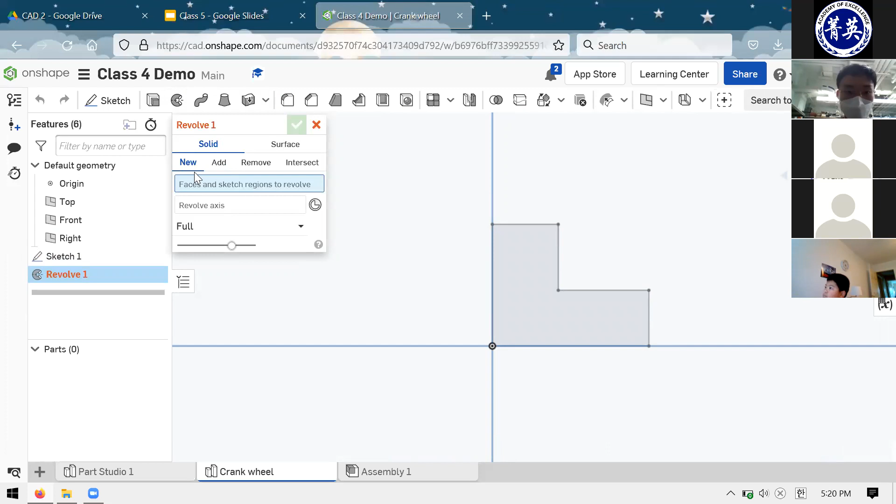So like I said, our next step here is to use the revolve tool. You've also used this before to make the handles on the ellipse trammel and the sprocket assembly that we made. And the revolve tool hopefully is familiar to you. You open it up, solid, new. You want to select a sketch region as the thing you just sketched, and the revolve axis will be this vertical line here at the center.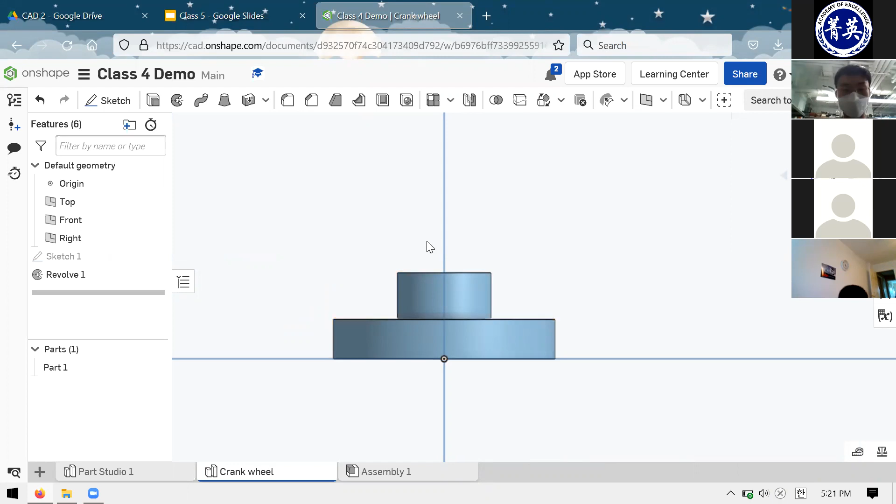And when you look at it from a side view, you're going to see two rectangles. So if I go to right view, you can see there's a rectangle here and there's a rectangle here. This is kind of what we were seeing in the drawing. So at this point, with this shape in our workspace, all we have left is to drill a few holes, right? Looking at the dashed lines in this drawing, you can see that there are 3 holes.

There is one big one that goes straight through the center of the part. There's a small one that goes kind of here towards the top of the part. And there's another one here, the third one, that kind of goes on a different axis. It kind of goes sideways into this cylinder. So we're going to create these 3 holes now.

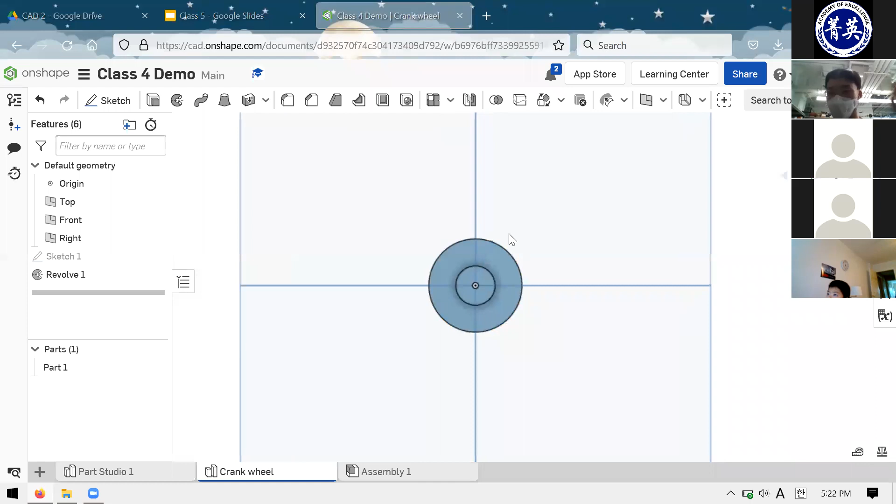So let's get right to it. I'll demonstrate the hole tool. For those of you who missed last class, this is the main new thing that we learned last week, other than the whole importing and exporting parts, but I'm sure you'll be able to catch up to that as well.

So we'll start off with a simple example. We'll drill the hole that goes straight through the center here. Looking at the drawing, the diameter of that is 0.25 inches. It's a quarter of an inch. And looking at the side view, I can see that it just goes entirely through the whole part.

So this is your hole tool. It's located kind of in the middle next to the pattern tool. So one to the left of that is your hole tool. You click on it, it opens this up, and there's a lot here. Don't be intimidated. For the most part, you don't need these.

I need to charge my computer.

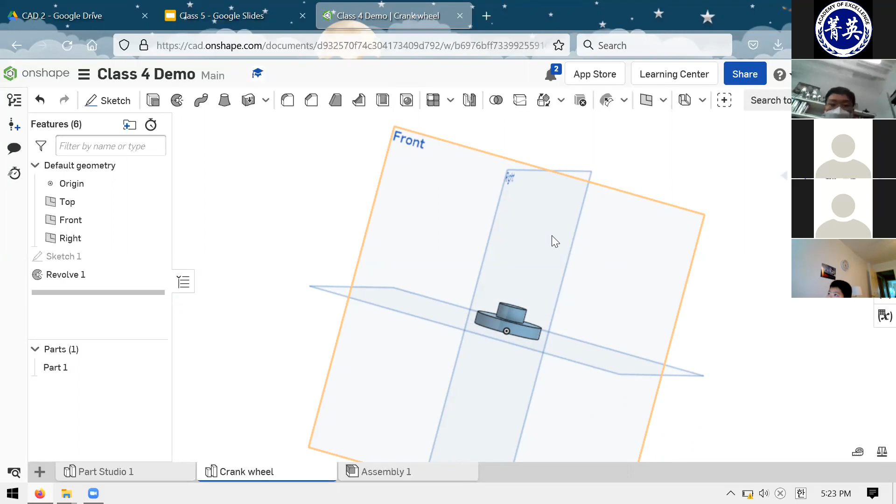But what do I do again? Because I'm confused. So are you able to create these? Do you have this right now? No, I don't. Can you show me again? Yeah, so we're able to create this sketch here. Yes. But I don't know how long. What's the distance of the line that separates the top from the bottom?

Sorry, I need to move myself to charge my computer, but here you go.

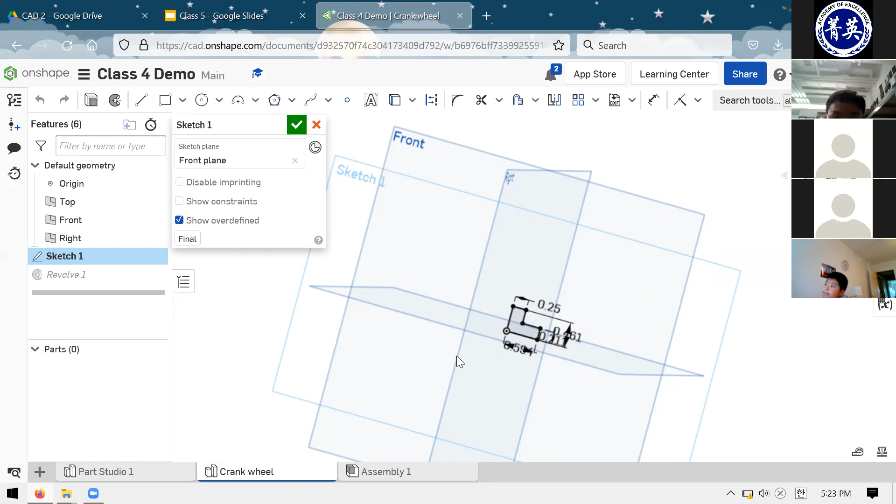I'll bring up the sketch for a second. Oh, okay, I have it. Right, so now what do I do? The next thing you want is to revolve that as you did for the handle back in CAD course 1. Well, how do I revolve? So your revolve tool is the second one over. It's next to the extrude tool. But what do I revolve? Like how? I clicked it, but how do I revolve?

Right, so the revolve tool asks you for 2 parameters. Basically, the first one is a face or a sketch region. So the thing that we just sketched, this shape, that's your sketch region. And the second thing is a revolve axis. That's the line about which you're rotating that sketched profile to create your 3D part.

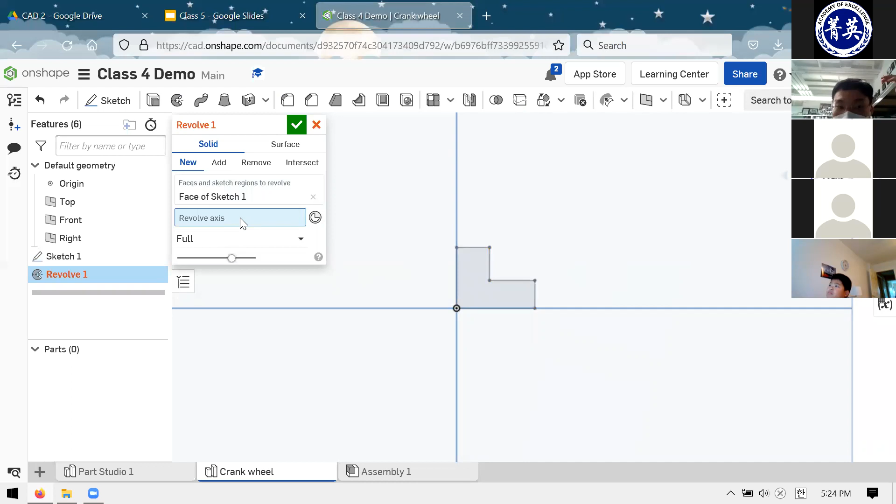So in our case, our revolve axis is this vertical line here. If you just click those 2 things, hopefully this is what you see. And you can hit the green check mark and get the 3D shape.

So again, we're kind of running towards the end of the class, so I'll show you how to do the hole tool. There's a good chance that we won't actually finish the part, but I'll show you enough about how to use the hole tool so even if you weren't here, you'll be able to finish this part. So hole tool right here in the middle. There's a lot of things here, but don't be too intimidated. For the most part, you don't need most of them.

In our case, we'll always use a simple hole. Counterbore and countersink are used to create the little divots or indentations at the opening of the hole. And that's for using hardware like screws or bolts. But since we're just making a model, we're not going to build this thing in real life, we don't have to worry about that.

Next, we essentially have 2 options here, through and blind. Through means you go through the entire part. Blind means the hole will stop at some point, so it doesn't go through the entire part. Essentially, blind just means not through, and through means it goes all the way through. In this case, we have a hole that goes all the way through, so you're going to use the through option.

Next is the standard. For this project, we're only going to use custom and ANSI. In this case, we'll use custom, but I'll also show you ANSI just so you know what it does. Custom is easier though, because all you have to do is specify a diameter. In this little icon here, you can see that it's indicating the diameter distance. We know that the diameter is 0.25 from the drawing.

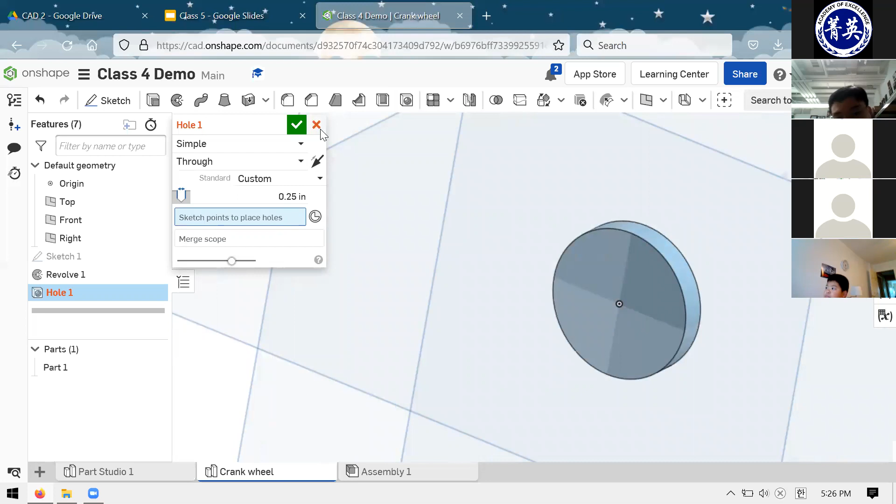And then the next thing is a sketch point. I had assumed that you can just use the origin as a point, but turns out you can't. So we'll backtrack for a second here. In order to create a hole using the hole tool, apparently you need to use a sketch. So we'll create a sketch.

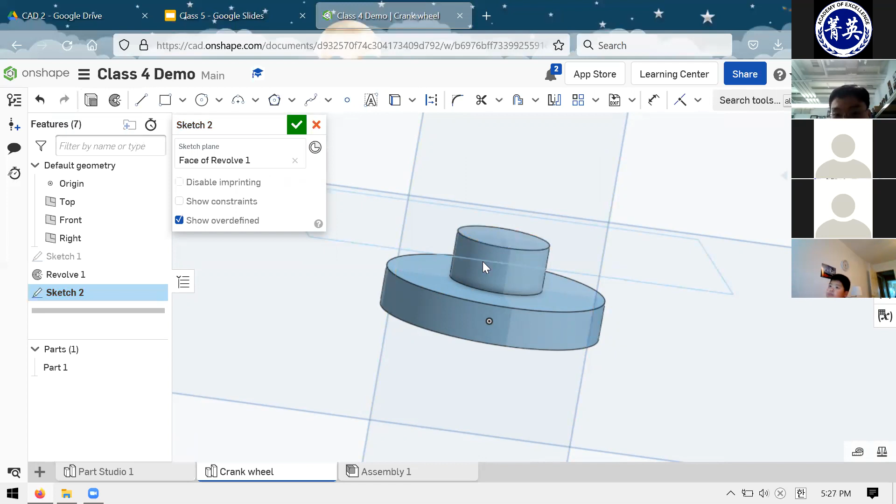I want to sketch on this knob here, so I'll click on this face. You've seen me do this before, where I sketch on a face of a part. So I'm sketching right here on this. And we have our point tool here, again, the 6th one over, next to the spline tool and the text tool.

So I can click anywhere on here, but I'll just look down on here and I'll click on the origin. I'll click right on the center here. And that'll create my point, hopefully.

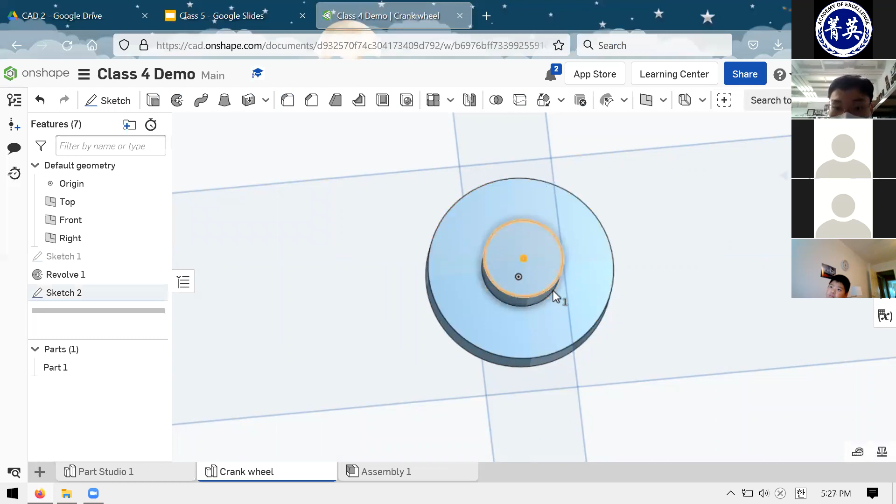You can see that I created my point. And that's the only thing I need in my sketch, just a single point. I'll confirm the sketch, and I have my sketch with a point in it. So sorry if I go through this a bit fast, but we're almost out of time, so you can watch the recording if you need a slower tutorial. I also went through this somewhat deeply last class, so you can also watch that.

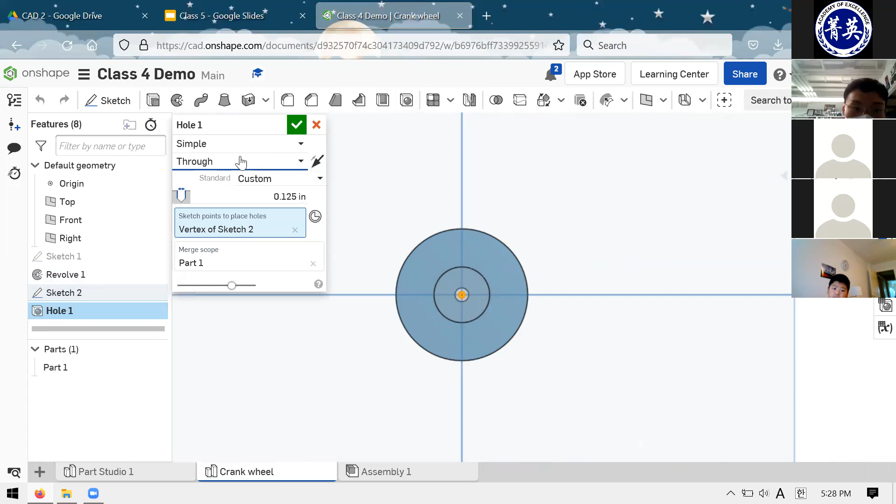We have our hole tool. Again, simple, blind, or simple through, custom, and the diameter is 0.125. And now I select this vertex. So on this sketch vertex, on this point, that is where the hole will be drilled essentially. And the merge scope is just part 1. That'll probably happen by default. And if I do that, the hole tool allowed me to create a hole in my part.

So I didn't have to CAD a circle, I didn't have to sketch a circle, I didn't have to extrude anything. I just used the single hole tool and I used a point that I sketched in this sketch, and that let me create a hole. Now you might be wondering, if you weren't here last week at least, what do all these numbers mean? What does 6-32 thread mean?

That is the other option that is not the custom hole. So custom is for when you want to specify the diameter yourself. ANSI is for when you're using hardware. So if you go to the hardware store and you buy screws or bolts or whatever, it's going to be to some kind of standard. And if you're in America, it's probably going to be ANSI. So in terms of this, don't worry about it, I'll just tell you what to do.

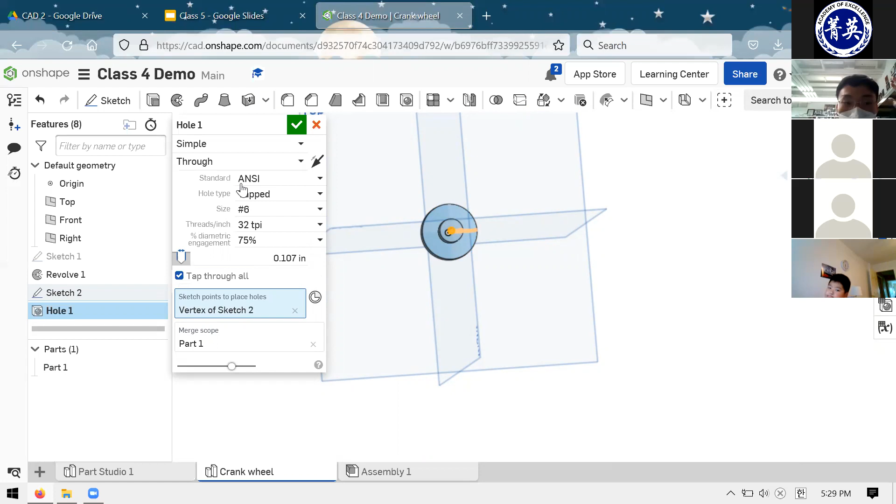You want to click tapped. If there are 2 numbers, if there's a number dash another number, you want to click tapped. Size is 6, threads per inch is 32, and that's where 6-32 comes from. You have number 6-32. This percent doesn't matter for you at all. Don't worry about it. And this diameter is filled in automatically based on the ANSI standard. So it seems pretty overwhelming since there's a lot of things to do, but you just need to copy this exactly.

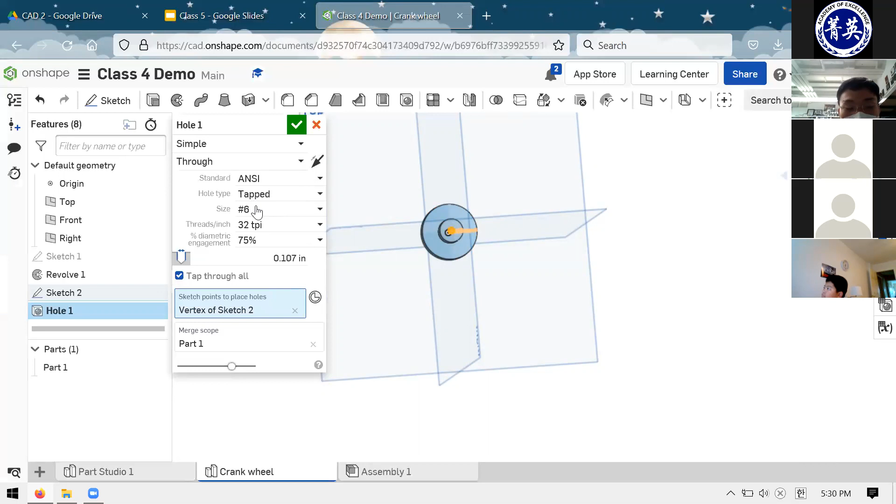Or if you can't figure it out, it doesn't really matter what the hole diameters are, you can make something up for the homeworks. But hopefully it's pretty straightforward. You just pick your standard ANSI. If there are 2 numbers, like number dash number, you click tapped. Number 6-32, that's where 6-32 comes from. You don't have to touch this, this, or this. It's the same process, and you click check mark and it creates the correct hole that is marked by this drawing.

So that brings us to the end of the class, but hopefully you can imagine how you create the rest of this crank wheel. Depending on the course schedule, I might finish this demonstration next week, or we might just go to the assembly.

When we come back next week, I'll either continue to finish the part demonstrations, or we'll start on the assembly. And if you don't have all the parts CADed because you missed a class, don't worry too much about it, because we'll figure some way to let you do the assembly regardless. So in any case, the main lesson is do one of these 2, and I'll see you again next week, same time, 4:30 on Friday.